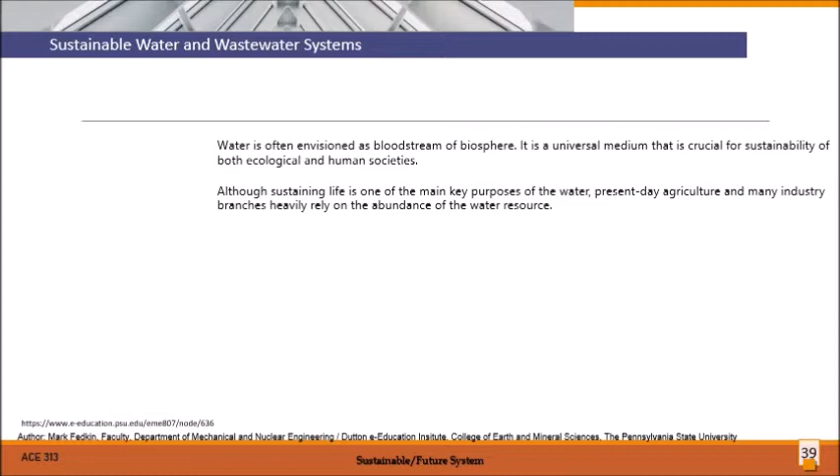This is the continuation of the report on Sustainable Future Systems: sustainable water and wastewater systems. Water is often envisioned as the bloodstream of the biosphere. It is a universal medium that is crucial for the sustainability of both ecological and human societies. Although sustaining life is one of the key purposes of water, present-day agriculture and many industry branches heavily rely on the abundance of the water resource.

To plan sustainable utilization of water resources, we must understand how water cycles. A water cycle works at the global and local scales. The amount of water on Earth is finite, and the natural water cycle is a system that controls the circulation and redistribution of that resource. Annual evaporation from the ocean is about 80,000 cubic miles versus 15,000 cubic miles from the land. Given the amounts of water evaporated and precipitated are almost equal, the total amount of water exchanged between the atmosphere and the Earth's surface is about 95,000 cubic miles.

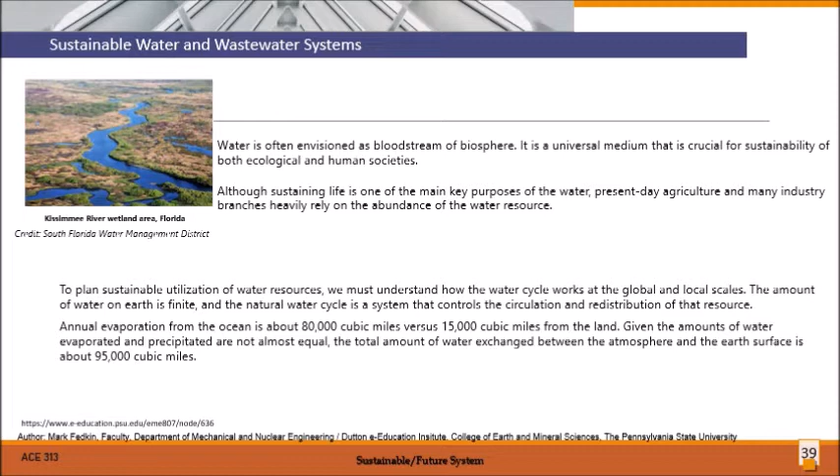Here are examples of possible actions that help keep combined water systems sustainable. First, water regime management. It keeps aquifer levels within an appropriate range, prevents flood damage in developed areas, and prevents excessive erosion. Water quality: minimize the export of pollutants to surface water or groundwater. It minimizes waterborne sediment loading, minimizes pollution from sewage, and protects existing vegetation.

Next is water conservation. Control water extraction and use. Promote the use of rainwater and stormwater, where such use does not adversely affect existing environmental values. Promote the reuse of wastewater effluent. Reduce irrigation requirements. Promote opportunities for localized supply. Water value: enhance water-related environmental values, enhance water-related recreational and cultural values, and add value while minimizing development costs.

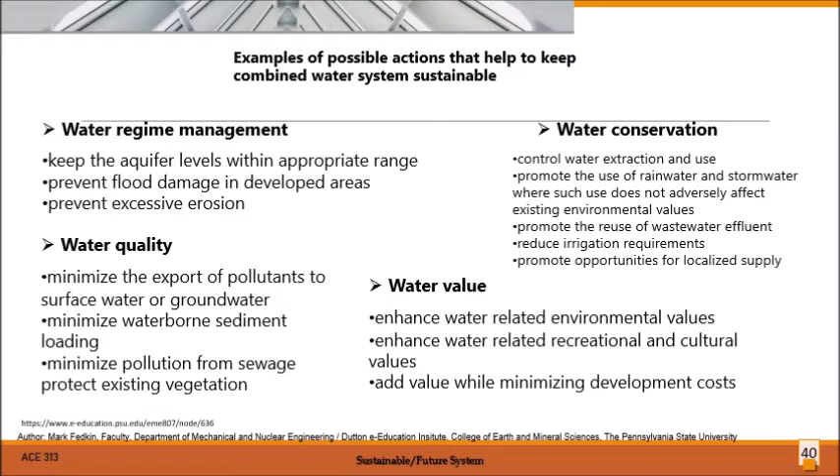Next is water conservation and protection technologies. Although residential water consumption accounts for a smaller fraction of the whole, domestic water economy is considered an important factor in urban sustainability. The overall domestic water use is expected to grow as world population grows, right?

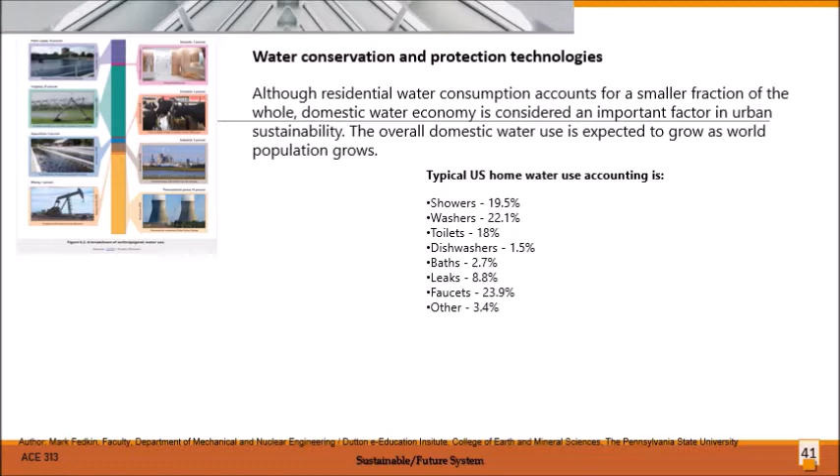Okay, next slide. Water conservation strategies. As the population grows, so does the stress on available water resources. Hence, there are a number of water conservation strategies. Limiting the consumption: application of policies, economics, and technologies helps regulate the demand. Policies may include restrictions and bans on certain types of water use, standards for fixtures and appliances, enforcement of recycling, etc. Economic measures, such as setting prices for water consumption, typically make people more diligent about their water-related activities. So, once money is involved, people pay attention.

Technological advances may help us use less water for the same function, like water economy washers, toilets, etc. Reuse and recycle: designing systems for reuse and recirculation of water in both domestic and industrial applications is involved in this approach. For example, treated wastewater can be used for irrigation, or water can be recycled in certain types of car wash systems. Elimination of losses, regulation, metering, water-sensitive design, and smart technology are key factors contributing to this strategy. Leak identification systems and smart controllers for water use are some such conservation technologies.

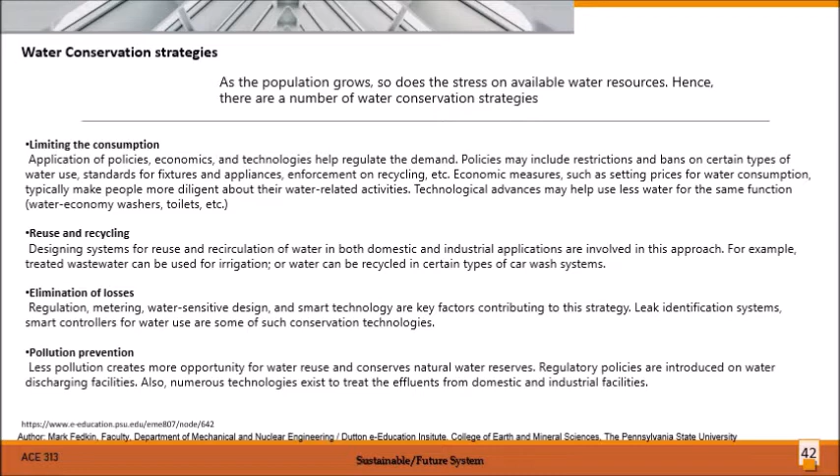Next is pollution prevention. Less pollution creates more opportunity for water reuse and conserves natural water reserves. Regulatory policies are introduced on water discharging facilities. Also, numerous technologies exist to treat the effluents from domestic and industrial facilities.

Water treatment systems. Water treatment technologies are designed to eliminate harmful effects of pollutants and natural substances on human health and the environment. These technologies are often placed at the transitions between the environment and the human sphere to adapt the water quality. So this is the water treatment system.

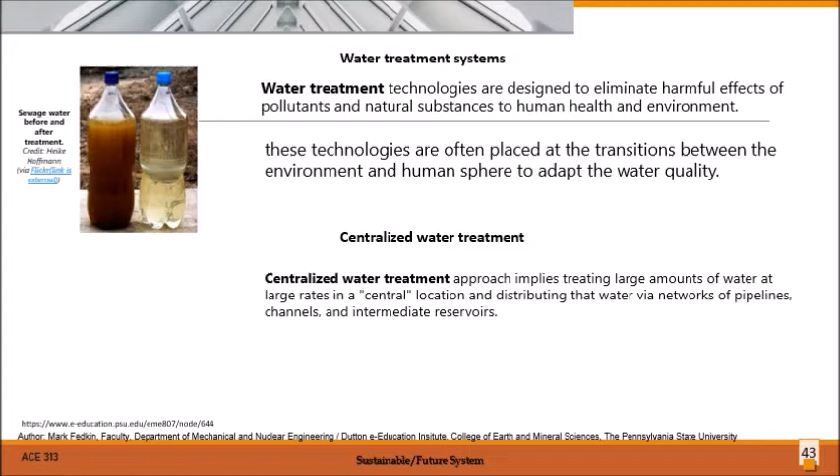Sewage water before and after treatment. Centralized water treatment. This approach implies treating large amounts of water at large rates in a central location and distributing that water via networks of pipelines, channels, and intermediate reservoirs. So, like the water district.

And engineered ecological systems for water treatment. Traditional water treatment plants accomplish an important function. However, these facilities themselves produce significant environmental impact by consuming energy, producing emissions, byproducts, and waste to be disposed of.

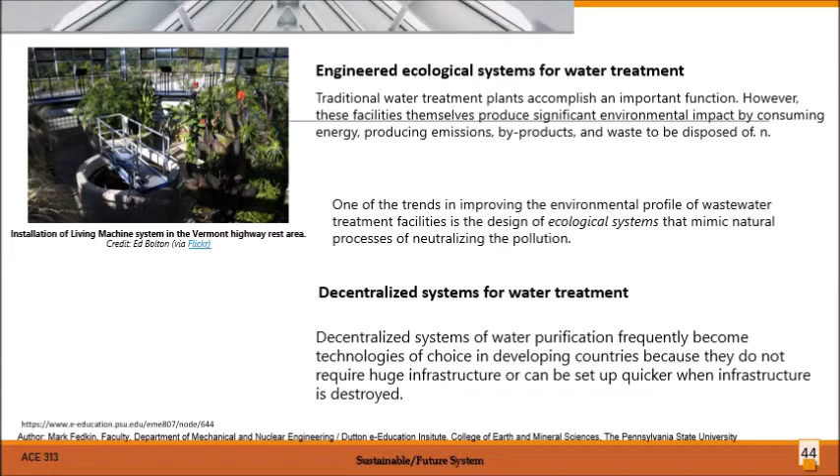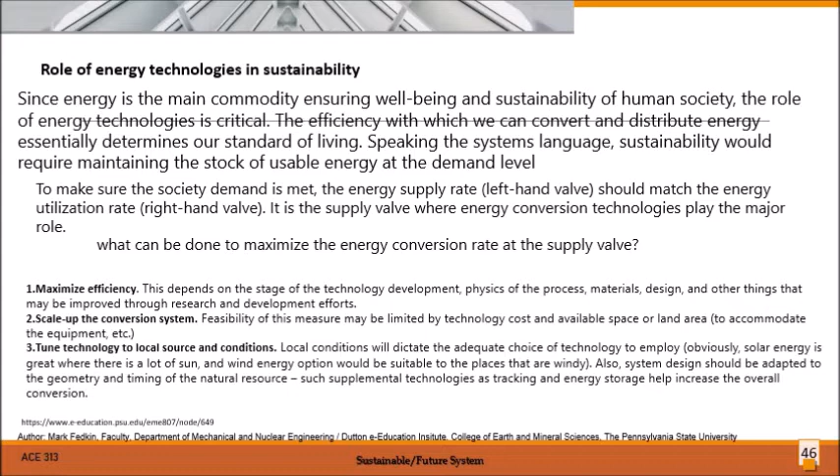Local conditions will dictate the adequate choice of technology to employ. Obviously, solar energy is great where there is a lot of sun, and wind energy options would be suitable to places that are windy. Also, system design should be adapted to the geometry and timing of the natural resource, and supplemental technologies such as tracking and energy storage will help increase the overall conversion.

Building integrated solar energy technologies. PV basics. Since this was already discussed by the previous reporter, this is just the review. Okay, so PV basics. Photovoltaic PV technology is one of the ways to convert solar resource into usable energy, specifically sunlight to electricity.

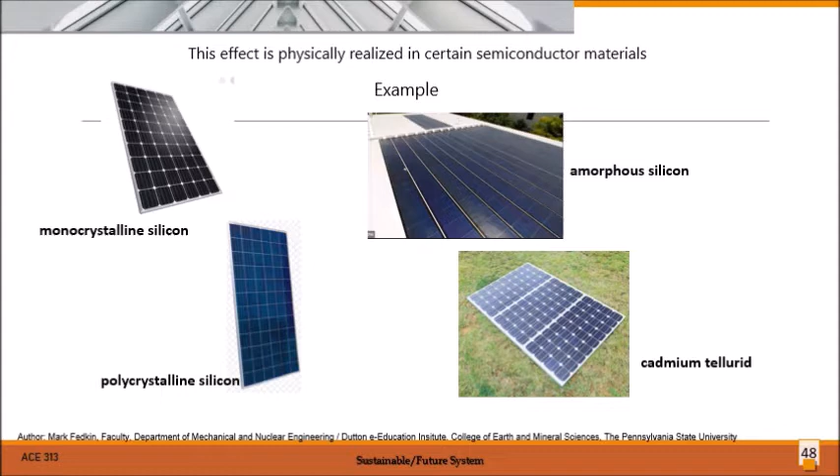Photovoltaic conversion is enabled by certain semiconductor materials, which have a property to generate electric current when they absorb incident photons. Absorption of light, generation of charge carriers, electrons and holes, separation of charge carriers so that they can perform work. So from solar cell to solar module and solar systems. This effect is physically realized in certain semiconductor materials, for example, monocrystalline silicon, amorphous silicon, polycrystalline silicon, and cadmium telluride.

So PV application in buildings. Current applications of solar photovoltaics are adapted to the following scales. Portable, small electronics, for example calculators and computers, etc. Distributed power generation, the homes, isolated equipment. Utility scale power, solar farms. In the scale-up process, single PV cells are combined into modules, and modules can be arranged into arrays: cells, modules, and arrays.

Building Integrated Photovoltaics, or BIPV, are multifunctional materials that are both structure supporting and power generating at the same time.

Building facade with integrated photovoltaic panels. Well, the main function of a conventional PV system is efficient power generation. The building integrated PV systems, which become the components of the building envelope, must satisfy a number of additional requirements such as appearance, color, image and size, weathertightness, wind loading, durability,

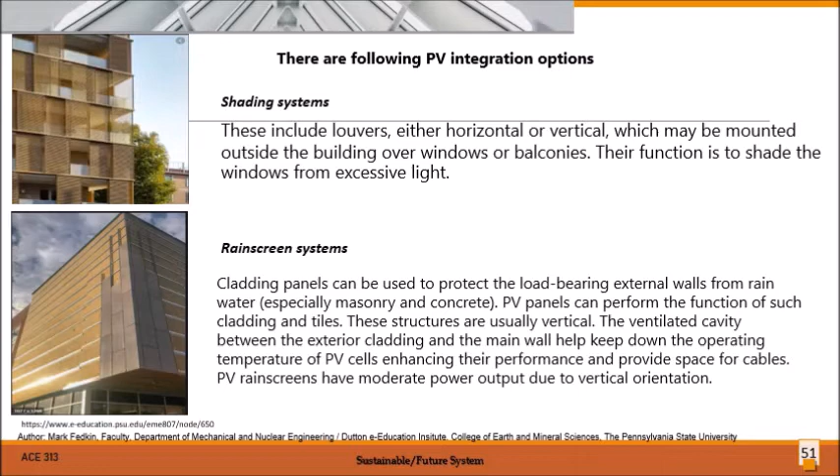The stick system curtain walls and also the unitized curtain walls. So the stick system curtain walls are used in those buildings that have internal columns or structural steel to support the main loads. Curtain walls are not weight-bearing, and their main function is to resist air and moisture infiltration. Also, building insulation is often attached to them. Warm facade.

A popular solution is to build the curtain walls from aluminum and steel framing filled with glass panels. PV panels can be sealed into curtain wall structures in both the vision area or opaque area of the facade instead of regular glass.

The unitized curtain walls: the unitized wall segments are pre-assembled at a factory and then delivered to the building site. The controlled industrial environment provides more precision and quality of sealing the PV panels into the wall framework and making cable connections. Double skin facades.

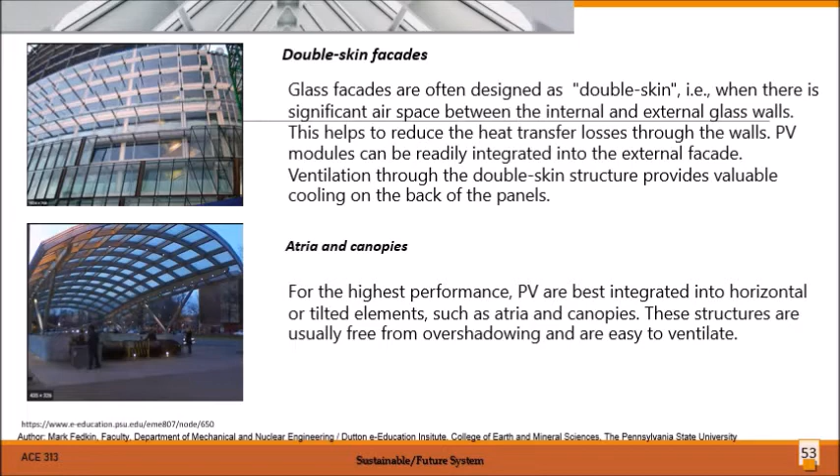The solar thermal electric power generation. Solar thermal technologies are designed to convert the incident solar radiation into usable heat. The process of solar heat conversion implies using energy collectors, especially designed mirrors, lenses, heat exchangers, which would concentrate the radiant energy from the sun and transfer it to a carrier fluid.

The fluid passes through the sunlight collector and becomes very hot. Typically, heat carrier fluids are water or steam, oil or molten salt. Then the fluid is transferred to the heat engine, which converts the energy to electricity.

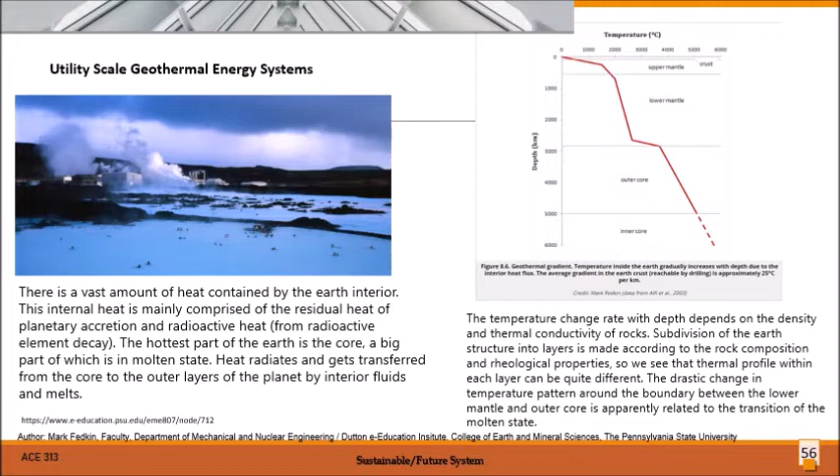Wind energy applications and technologies. Wind energy is primarily used for power generation. Wind power conversion systems have been increasingly employed in the US, Europe, India, and more sparingly in some other locations over the last decade, due to the development of technology that allows relatively high efficiency of wind resource conversion. We have here a video on how wind energy or the wind turbine works. Please watch this.

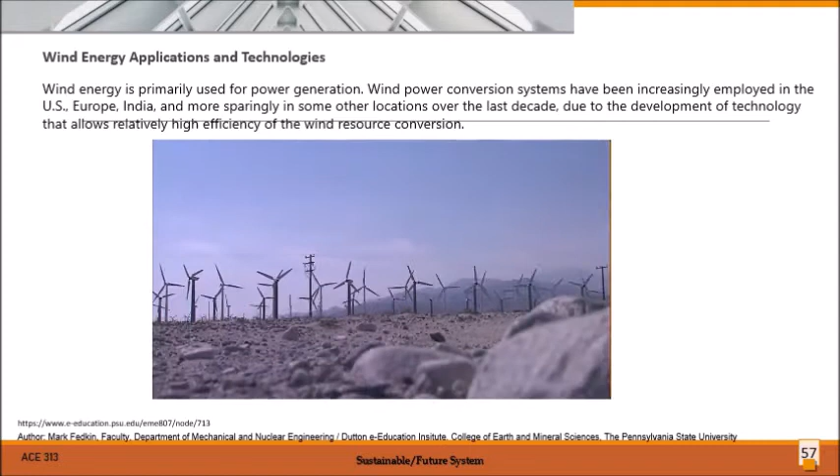We've all seen those creaky old windmills on farms, and although they may seem about as low-tech as you can get, those old windmills are the predecessors for new modern wind turbines that generate electricity. The same wind that used to pump water for cattle is now turning giant wind turbines to power cities and homes. Okay, have a look at this wind farm in the California desert. A hot desert next to tall mountains, an ideal place for a lot of wind. Here's another one on the windy prairies of Wyoming. Now, today's wind turbines are much more complicated machines than the old prairie windmills, but the principle is the same. Both capture the wind's energy.

Okay, here's how it works. First, a wind turbine blade works sort of like an airplane wing. Blowing air passes around both sides of the blade. The shape of the blade causes the air pressure to be uneven, higher on one side of the blade and lower on the other. And that's what makes it spin. The uneven pressure causes the blades to spin around the center of the turbine. On the top, there's a weather vane that's connected to a computer to keep the turbine turned into the wind so it captures the most energy.

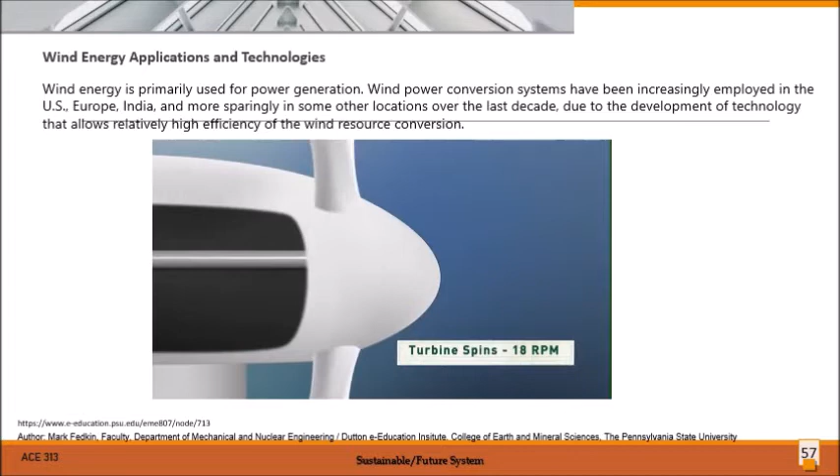Now the blades are attached to a shaft which only turns about 18 revolutions a minute, and that's not nearly fast enough to generate electricity by itself. So the rotor shaft spins a series of gears that increase the rotation up to about 1800 revolutions per minute. And at that speed, the generator can produce a lot of electricity.

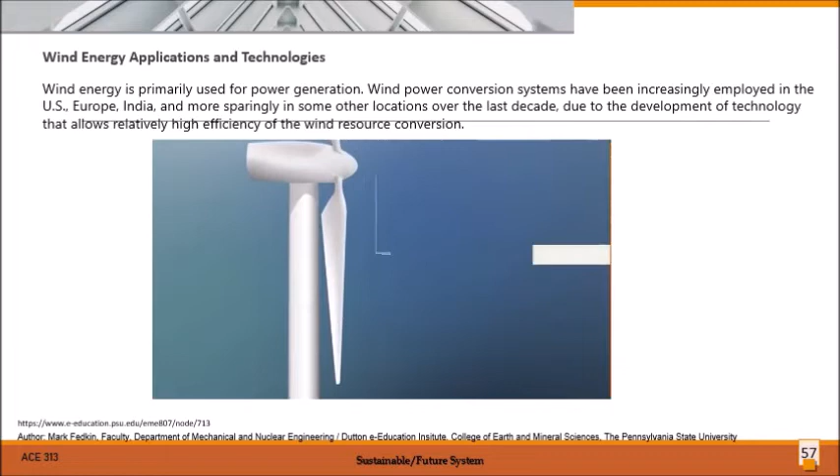So why are wind turbines so tall? Well, the higher up you go, the windier it is. More wind naturally means more electricity. And in many cases, larger turbines can also capture wind energy more efficiently. The blades can sweep a circle in the sky as long as a football field. Now, what's really cool is that even a small wind farm, like this one in Wyoming, can generate enough electricity to power more than 9,000 homes. And larger farms can provide much more clean energy for our homes and businesses.

Energy Return on Investment, or EROI. EROI is a common metric applied to energy conversion systems. It is defined as the ratio of the lifetime usable energy generated by the system to the energy spent for the system manufacturing, operation, maintenance, and disposal. Obviously, EROI equals 1 would mean that over its lifetime, a system produces as much energy as is being consumed for its creation and operation.

For wind turbines, the typical estimate of the EROI is in the range from 5 to 35, depending on the type of system. This indicator significantly increases with the size of the turbine rotor. The latest generation large-scale turbines yield EROI values of about 35 and higher.

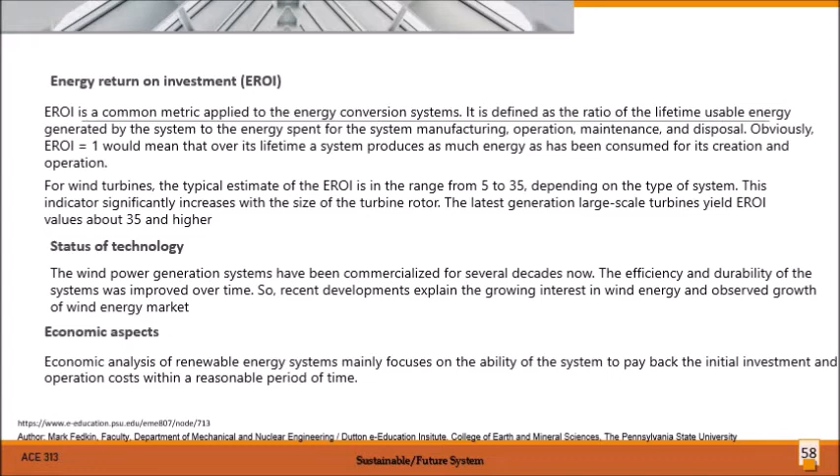Status of technology. The wind power generation systems have been commercialized for several decades now. The efficiency and durability of the systems was improved over time. So, recent developments explain the growing interest in wind energy and the observed growth of the wind energy market. Economic aspects. Economic analysis of a renewable energy system mainly focuses on the ability of the system to pay back the initial investment and operation cost within a reasonable period of time.

The biomass fueled combined heat and power system. Biomass as a source of fuel has been part of global energy economy throughout the human history. Using biomass as fuel via combustion may help solve the fuel supply issue, since biomass is renewable, but does not help solve the global carbon emission and pollution problem.

Burning biomass produces CO, CO2, NOx, and other gases at levels exceeding those from traditional fossil fuels. The biomass combined heat and power, CHP. Biomass-fueled CHP or cogeneration is one of the applied technologies developed as a cost-effective method of energy recovery, because the byproduct heat generated in electricity generation is not wasted, but rather utilized as thermal energy.

The total efficiency of such systems reaches from 60 to 80%. There are three main stages in the biomass fueled CHP process. First is the biomass collection and preparation. Secondly, biomass conversion, A, to steam or B, to biogas. Third, power and heat generation.

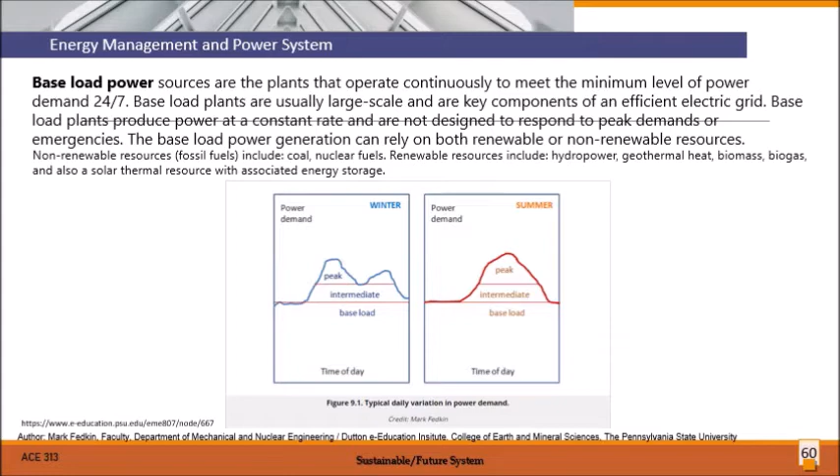There are a number of reasons why a plant can have lower than 100% capacity factor. Some of them are lower demand for electricity over certain periods of time, under capacity operation due to maintenance, equipment failures or interruptions, resource fuel shortage, equipment upgrade, or resulting in high nominal capacity.

The base load power plants typically are coal-fueled or nuclear plants due to low-cost fuel and the steady-state power they can produce. Hydropower and geothermal power can also be used for base load electricity generation if those resources are regionally available. Apparently, the difficulty with renewables is their intermittence in time and location bias. Comparison of typical capacity factors of various energy systems reflects this difficulty.

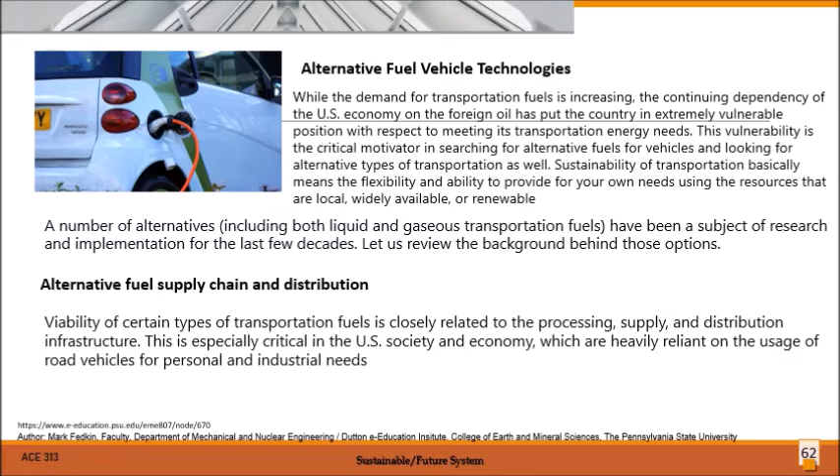Transportation emissions. Strong motivators for developing alternative vehicle technologies and fuels are growing emissions and alarming urban air pollution levels. According to US EPA, in 2017, CO2 emissions from the transportation sector surpassed the long-time leader, the electric power sector, in the total national emissions budget. This change in leadership in part happened due to increasing addition of natural gas and renewable sources to the power generation mix while retiring older coal power plants in a number of states.

Zero-emission vehicles. The concept of zero-emission vehicles is typically attributed to the transportation options that do not result in any harmful emissions during vehicle operation. Harmful emissions are defined as those known to have a negative impact on the environment or human health.

Typically, examples of zero-emission vehicles are electric or battery-powered cars, electric trains, hydrogen-fueled vehicles, and human or animal-powered transportation, for example bicycles, velomobiles, carriages, etc. The battery technology for electric vehicles is based on charge or discharge cycles, meaning that the battery is charged beforehand using an electric source and is discharged during vehicle operation.

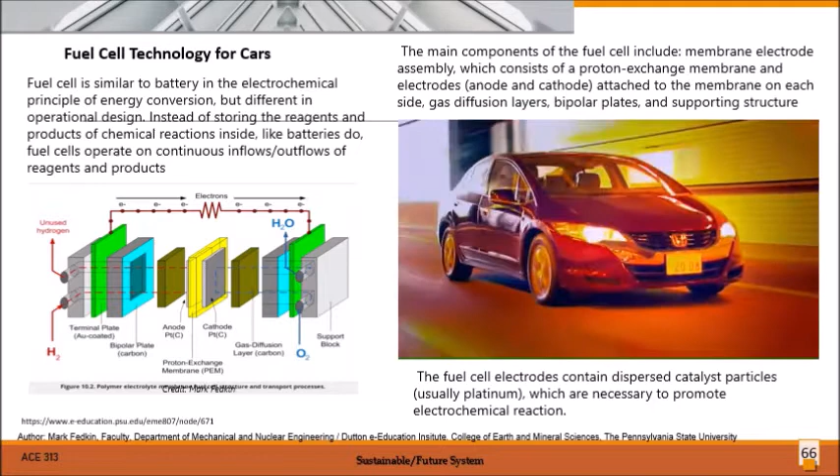Fuel cell cars, which run on electricity produced from compressed hydrogen, emit zero harmful emissions and could be the future of motoring. They can be just as fast, practical, and can travel as far as a conventional petrol or diesel engine car, but their technology is very different, and importantly, the only thing that comes out of the exhaust is water vapor.

Rather than having a petrol or diesel tank like a conventional car, the fuel cell car has a tank that stores compressed hydrogen as a gas. Hydrogen is used as an energy carrier so that the fuel cell car can produce its own electricity on board rather than storing it in batteries. This compressed hydrogen is expanded and then fed into the fuel cell stack.

The fuel cell stack is like a tiny electric power station. Inside it, the hydrogen combines with oxygen from the air to generate electricity and water as a byproduct. Water vapor is the fuel cell car's only emission. The electricity created inside the fuel cell stack is used to power the electric motor, which is in turn used to drive the car.

The fuel cell stack is made up of hundreds of individual cells stacked together like a loaf of bread. In fact, each cell is like a sandwich with a membrane electrode assembly, or MEA, between two separators, or bipolar plates. The MEA is made up of a proton exchange membrane, or PEM, which sits between hydrogen and oxygen electrode layers and gas diffusion layers.

In each cell, hydrogen gas passes over the hydrogen electrode. Each hydrogen atom is converted into a hydrogen ion in a catalytic reaction, releasing an electron in the process. The hydrogen ions then pass through the electrolytic membrane, where they bond with oxygen ions straight from the atmosphere. The previously emitted electrons from the hydrogen molecules arrive at the oxygen electrode via an external circuit.

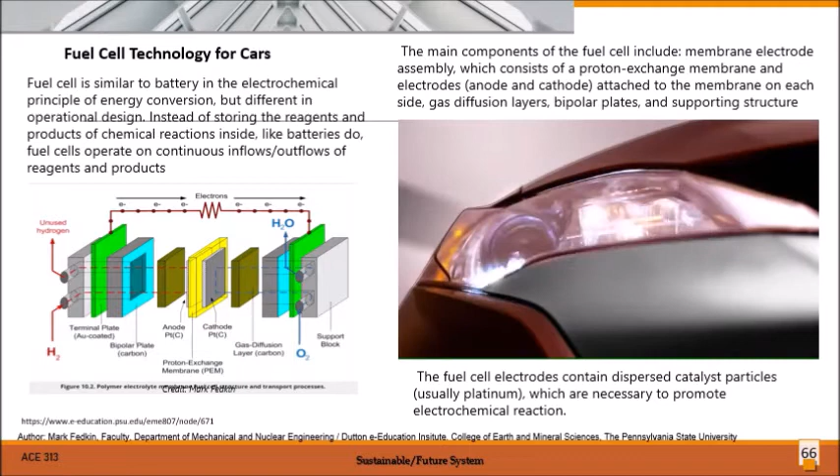Honda's FCX Clarity is the world's first production fuel cell car and is already on sale in the US and Japan.

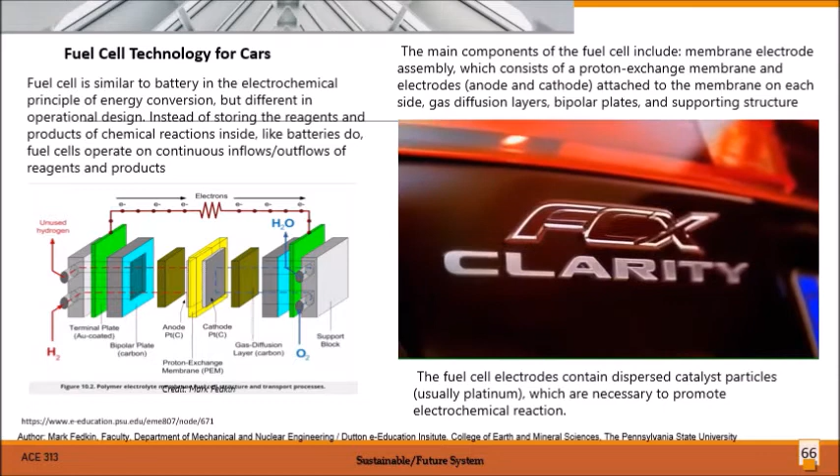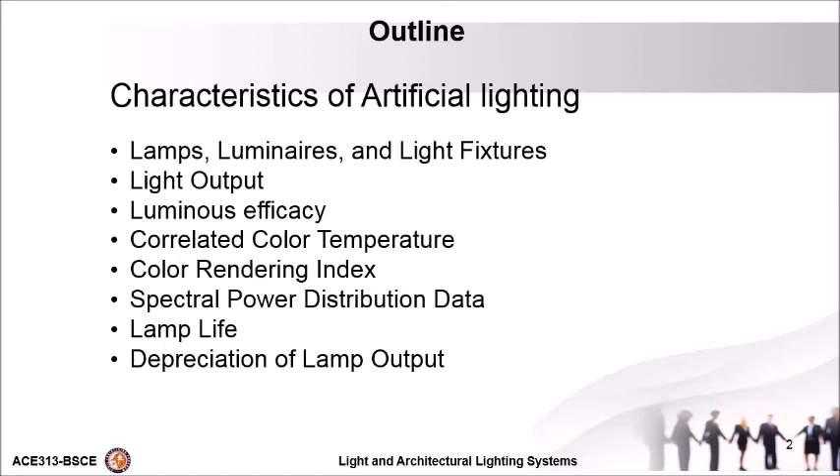So first is lamps, luminaires, and light fixtures. So lamps is a device that generates light, although frequently called a light bulb by the layperson. The term lamp rather than bulb is used in the lighting industry to avoid confusion when describing a light source, simply because a bulb is the glass portion of a lamp that encloses and protects the working parts of the light source, whereas a lamp is a source of light.

Lamps fit into two broad categories. First is incandescent lamp. Incandescent lamp or incandescent light globe is an electric light which produces light with a filament wire heated to a high temperature by an electric current passing through it until it glows. The hot filament is protected from oxidation with a glass or quartz bulb that is filled with inert gas or evacuated. The light bulb is supplied with electrical current by feed through terminals or wires embedded in the glass.

Most bulbs are used in the socket which provides mechanical support and electrical connections and has the capacity of 700 to 1000 hours and the temperature reaches about 2200 Celsius.

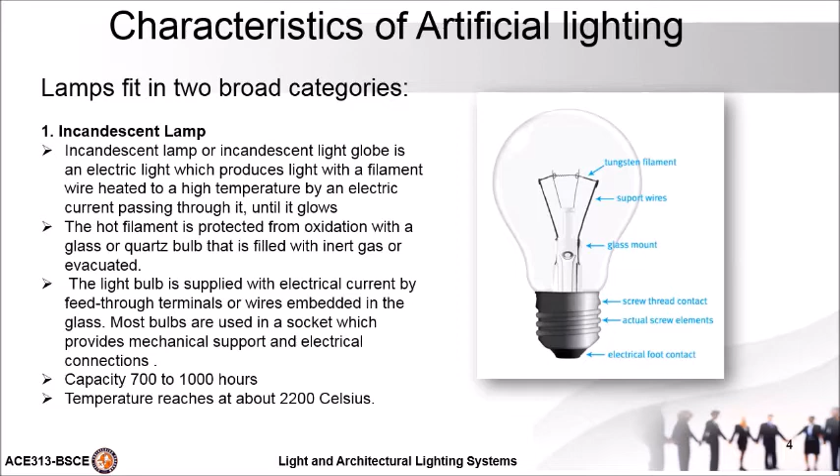Okay, second is gaseous discharge lamps. Gaseous discharge lamps can be further divided into two subcategories. First is low pressure lamps. A low pressure sodium lamp is a type of lamp that produces light from sodium gas contained in the bulb, operating at a partial pressure of 0.13 to 1.3 Pascal. Low pressure sodium lamps are highly efficient electrical light sources. They emit a very yellow light and require a ballast like fluorescent bulb.

Low pressure sodium lamps require up to 10 minutes to start and have to cool before they can restart. Therefore, they are most suitable for applications where they stay on for hours at a time. Most LPS lamps are used for driveways, parking lots, and pathways.

The second subcategory for gaseous discharge lamps is high pressure or HID lamps. High pressure sodium lamps, also known as HPS lamps or HPS lights, are a type of sodium lamp that is widely used in industrial lighting in many public outdoor areas. They are commonly used in public parking lots, roadways, and other security areas. High pressure or HID lamps include mercury vapor, metal halide, and high pressure sodium lamps. It produces a dark pink glow when first struck, and an intense pinkish orange light when warm.

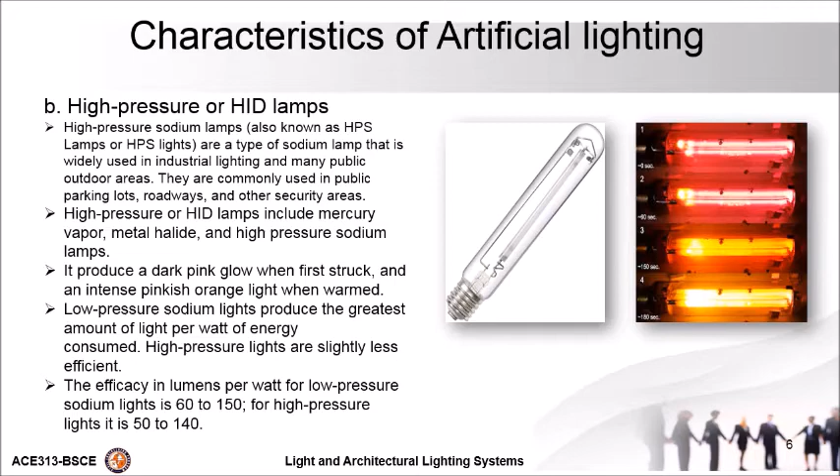Luminaires and light fixtures. Lighting fixtures, also called luminaires, help to create artificial light with the help of a lamp. Some luminaires also have a switch to control the intensity of the light. A light fixture is a device that projects, diffuses, and alters the light direction of a given light source. Luminaires can also be referred to as a system, as it contains the light source, the housing, the electrical system, the main connectors, reflectors, and shielding devices, or louvers.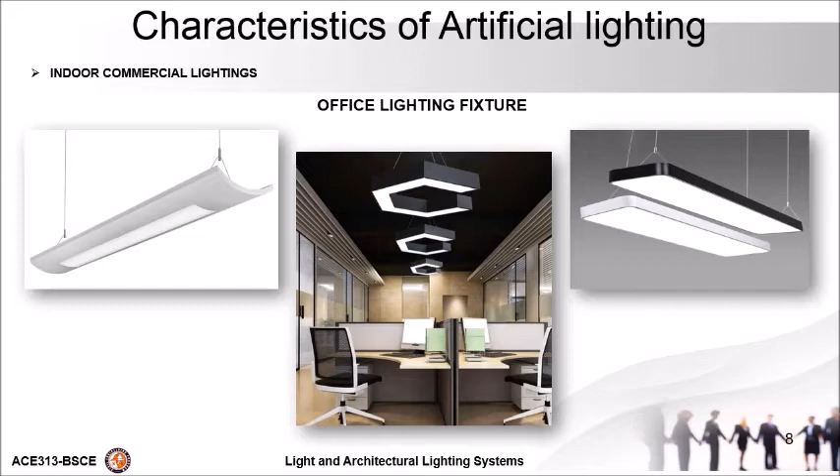Luminaires are categorized by two major classifications of prime usage: indoor or outdoor applications. So for indoor, we have commercial and industrial, and for outdoor, we have public and amenity. Here are some examples for indoor commercial lighting: the office lighting fixture and the retail lighting fixture.

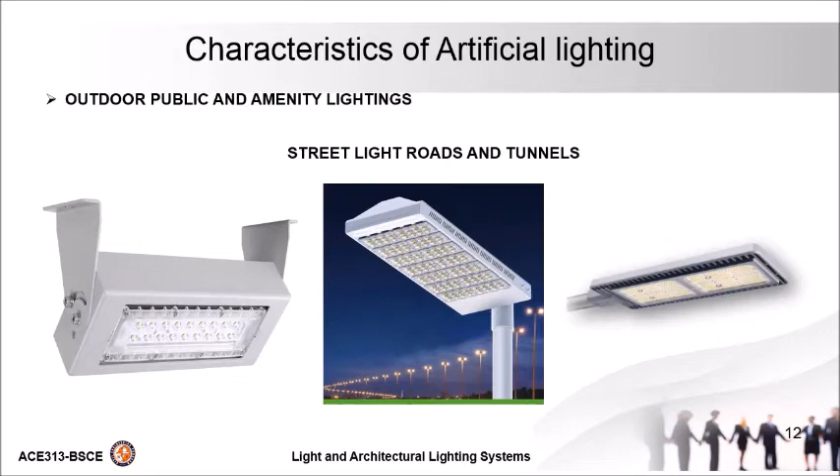Light output. Luminous flux. Luminous flux or luminous power is the measure of the perceived power of light. It differs from radiant flux, the measure of the total power of electromagnetic radiation, in that luminous flux is adjusted to reflect the varying sensitivity of the human eye to different wavelengths of light. The luminous flux is measured in lumen, simply lm. A lumen is defined as the quantity of light given out through a steradian by a source of 1 candela of intensity radiating equally in all directions.

1 lumen is luminous flux, or expressed more simply, the total amount of light energy emitted into one solid angle, 4 pi steradian, by a point source having a luminous intensity of 1 candela. Its flux is equal to 4 pi. The steradian, or simply sr, is the SI unit of solid angular measure, where there are 4 pi or about 12.5664 steradians in a complete sphere, about 7.96% of the area of the sphere.

Luminous intensity. A candela, or simply cd, is the SI unit of luminous intensity, that is the power emitted by a light source in a particular direction. 1 candela is 1 lumen per steradian.

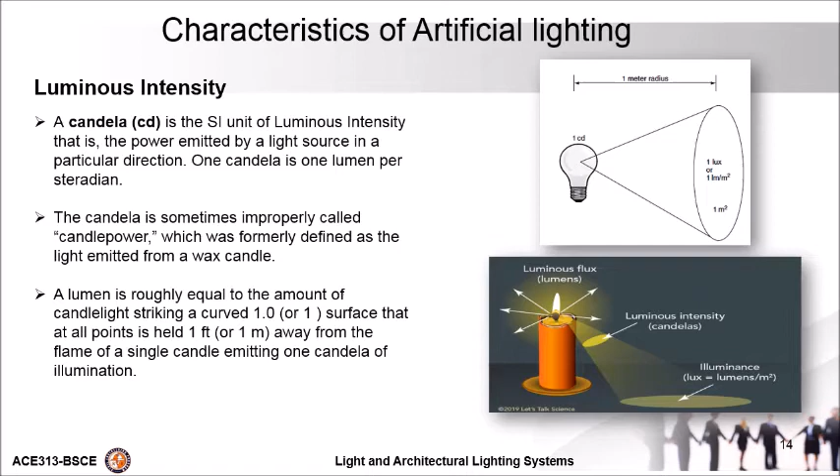Luminous efficacy. Luminous efficacy is the ratio of the light output of a light source, a specific lamp, to the electrical energy consumed, including the ballast if applicable, to produce that light source. It is expressed in units of lumen per watt of electric power, and is thus typically referred to as LPW. LPW is equal to light output, or lumen, over power input, or watt.

To apply this formula, let's have an example. Determine the luminous efficacy of the following lamps. First is a 40 watt incandescent lamp that emits 505 lumen of light. So we have the given light output, which is 505 lumen, over the power input, which is 40 watt. So we get 12.6 lumen per watt.

For the second example is a 40 watt fluorescent lamp and a 4 watt ballast that emits 3050 lumen of light. So we have the given light output, which is 3050 lumen, over power input, which is 40 watt and a 4 watt ballast. We just add them, so it becomes 44 watt, and we get 69.3 lumen per watt.

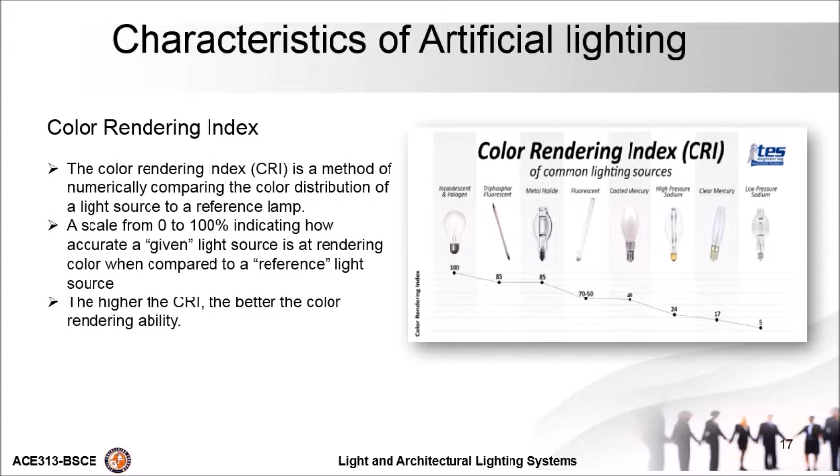Spectral power distribution data. A spectral power distribution curve is a graphic presentation of the quantities of light emitted by a lamp by wavelength component. These curves are a plot of radiant power versus a specific wavelength across the light spectrum. They provide a visual fingerprint of the color characteristics of the light emitted by the source over the visible part of the spectrum.

A spectral power distribution curve of an ordinary household incandescent lamp will typically show a large increase in radiant power from 380 nanometer to 780 nanometer. Light emitted by the source is weak in violet wavelengths, 380 to 400 nanometer. It increases through blue, green, yellow, and orange wavelengths and is very strong in red wavelengths, 600 to 750 nanometer. This type of lamp illuminates yellow, orange, and red colored objects very well.

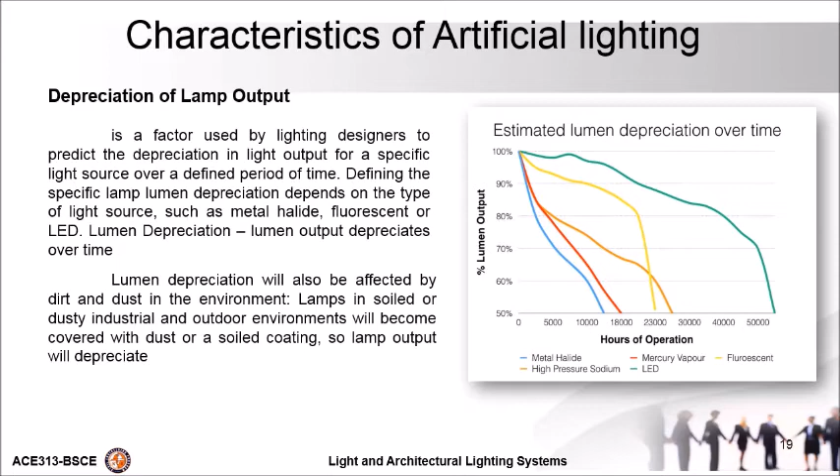Lamp life. The rated life of a lamp is its median life expectancy, expressed in hours. It is the cumulative time that lapses before 50% of a representative group of lamps has failed and the other lamps in the group continue operating. In other cases, rated life is difficult to determine because these lamp types will continue to emit light but get dimmer and dimmer with time. That is, they do not burn out.

Lamp life generally decreases each time a lamp is switched on and off. A continuously lit lamp will normally last much longer than one that is switched on and off regularly. Because of energy cost, this reduction in life does not warrant leaving lights on in an unoccupied space.

Life of incandescent lamps will be affected by the voltage they operate at versus the voltage for which they were designed. A slightly lower voltage means increased life because of cooler operation, but this reduces light output. Life of fluorescent and HID is greatly affected by the type of ballast. Lamp and ballast must be matched to ensure proper operation.

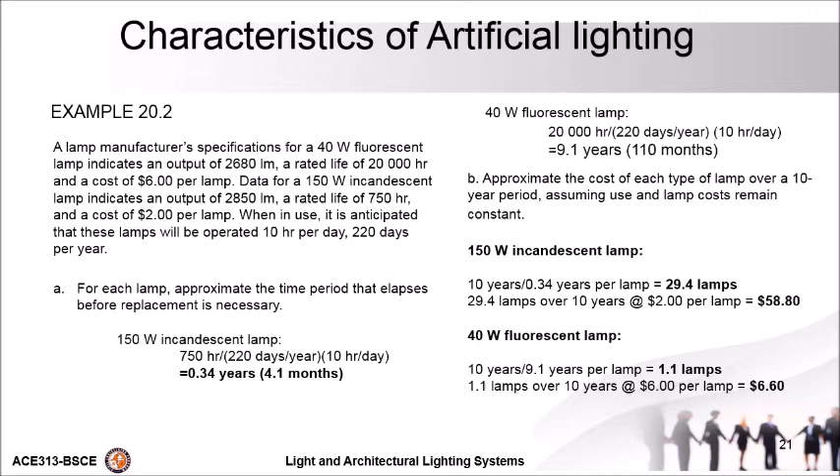My name is Kechi Esperona, and my topic for today is about light and architectural lighting systems. My topic outline for today is incandescent lamps, tungsten halogen lamps, luminous efficacy, gaseous discharge lamps, fluorescent luminaire efficacy, high-intensity discharge lamps, blended lamps, solid-state lighting, and mercury content of lamps.

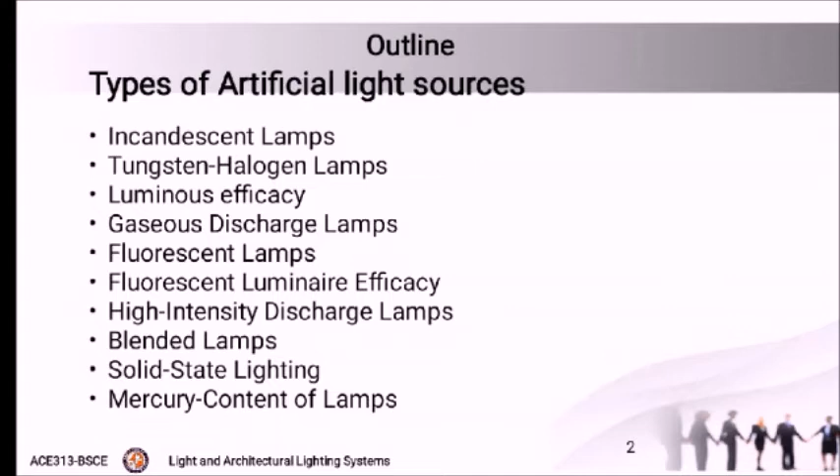The first decision in the design of a good lighting system is the choice of light source. There are three groups by construction and operating characteristics: the incandescent, the fluorescent, and the HID. The HID lamps can be grouped into four major classes: high-pressure sodium, metal halide, mercury, and low-pressure sodium.

First is incandescent lamps. What are incandescent lamps? These lamps produce visible light by heating a tiny coil or filament of tungsten that glows when it is heated by an electrical current. These are the familiar source of light, the so-called light bulb. Its advantages are low lamp cost, reliability, familiarity, and good color rendition. But they have a short rated life and poor efficacy, or LPW, lumens per watt. Lumens per watt is a key measure of efficacy in lighting.

These incandescent lamps can be found in applications needing excellent color rendition, such as retail, furniture, clothing and grocery stores, hair and beauty salons, restaurants, and art studios. The basic design of the incandescent lamp has essentially remained unchanged since Thomas Edison introduced a commercially successful lamp in the late 1870s. Thomas Alva Edison was an American inventor and businessman who has been described as America's greatest inventor. He developed many devices in fields such as electric power generation, mass communication, sound recording, and motion pictures.

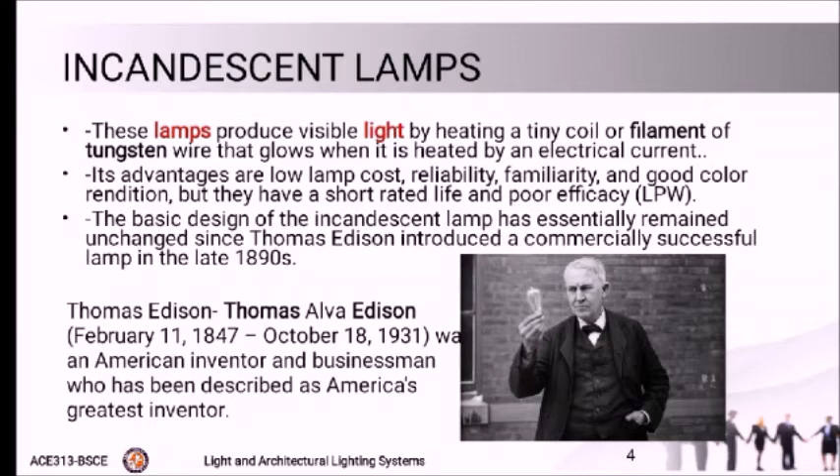When electricity flows through the filament of an incandescent lamp, the filament produces resistance against electrical current flow, causing it to heat up and incandesce, or glow with heat. That is where the word incandescent came from.

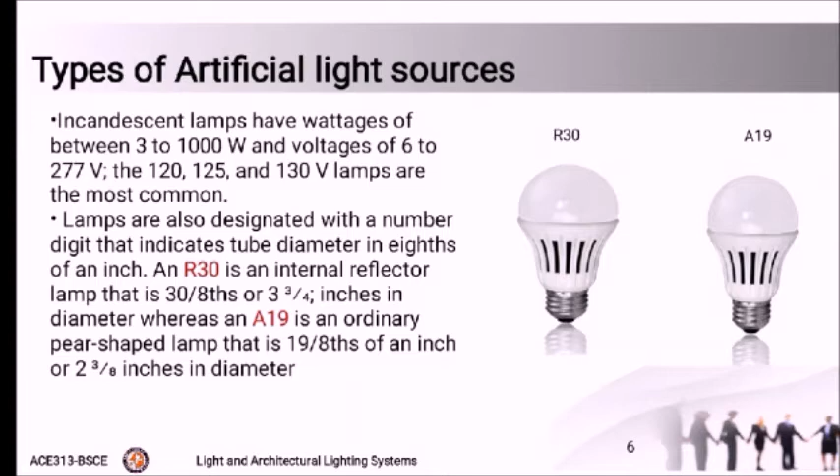The medium base is a familiar threaded base found with ordinary lamps up to 300 watts. The candelabra base is the smaller threaded base used in ornamental lighting such as chandeliers, and it is also known as the candle or the torpedo bulb because of its shape. And the mogul base is a larger threaded base found on lamps that are 300 watts or greater. An example is the frosted mogul base. It has 300 watts.

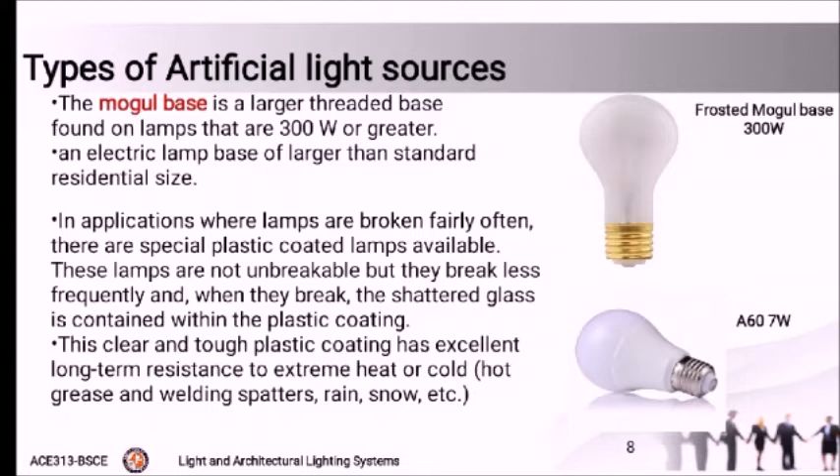In applications where lamps are broken fairly often, there are special plastic-coated lamps available. These lamps are not unbreakable, but they break less frequently. And when they break, the shattered glass is contained within the plastic coating. An example is the A60. This clear and tough plastic coating has excellent long-term resistance to extreme heat or cold.

Next is the tungsten halogen lamps. Tungsten halogen lamps, frequently called halogen lamps, are a smaller, brighter, and more expensive version of the incandescent lamp. These lamps contain high-pressure halogen gases such as iodine or bromine, which allow the tungsten filaments to be operated at higher temperatures and higher efficacies. A higher temperature chemical reaction involving tungsten and the halogen gas recycles evaporated particles of tungsten back onto the filament surface. This offers the advantages of better color rendition, more light output, and a longer life.

The tungsten halogen lamp cannot be touched by hand without depositing residual skin oils that substantially reduce the life of the quartz glass bulb. The same as the incandescent lamp, tungsten halogen lamps also have lamp designations: the TB, PAR, MR, T, and R. Tungsten halogen lamps have 6 components: the contact, base, capsule support, halogen-filled capsule, tungsten filament, and the bulb.

The tungsten filament of a halogen lamp has 2 purposes. One is to generate light, and the second is to generate the heat necessary to obtain a wall temperature exceeding 250 degrees Celsius. These lamps have been designed to maintain this required wall temperature when operated at design voltage.

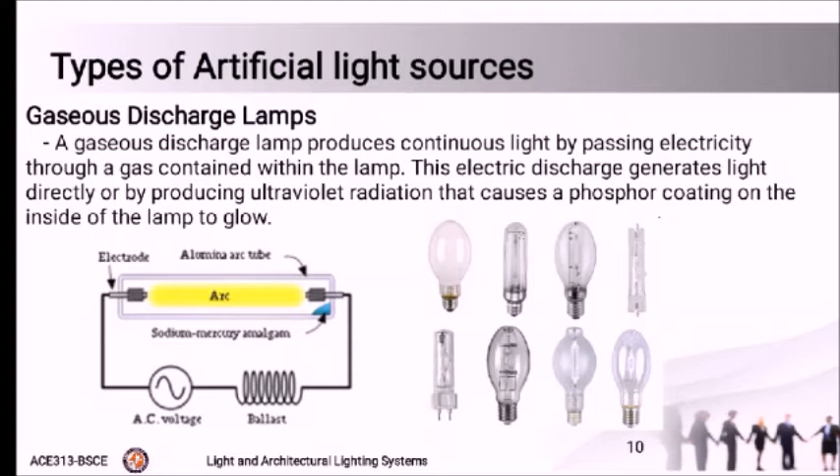All gaseous discharge lamps require an additional device called a ballast. A ballast is a voltage transformer and current limiting device designed to start and properly control the flow of power to discharge light sources such as fluorescent and HID lamps. It does not produce light directly. Instead, it is needed to create the starting voltage kick that causes the gas to arc and then controls the voltage, the current, and the waveform input to the lamp that is necessary for proper operation.

There are many types of ballasts. Magnetic or iron ballasts increase and control voltage. They are heavy and make a humming noise. Electronic ballasts use solid-state electronic components. They tend to operate more efficiently with less noise and are capable of dimming lamp or lumen output. A is extremely quiet, like libraries or churches. B is slightly noisy, like classrooms, seminars, or offices. And C is moderately noisy, like a workshop or open forum.

Next is fluorescent lamps. A fluorescent lamp is composed of a tubular glass bulb that is covered with a thin phosphor coating on its inside surface. The glass bulb is filled with low-pressure gas containing mercury vapor. The base or bases at the end of the lamp are designed to connect the lamp to an electrical circuit. Fluorescent lamps use 25 to 35% of the energy used by incandescent lamps to provide the same amount of illumination, or a lamp efficacy of 30 to 110 lumens per watt.

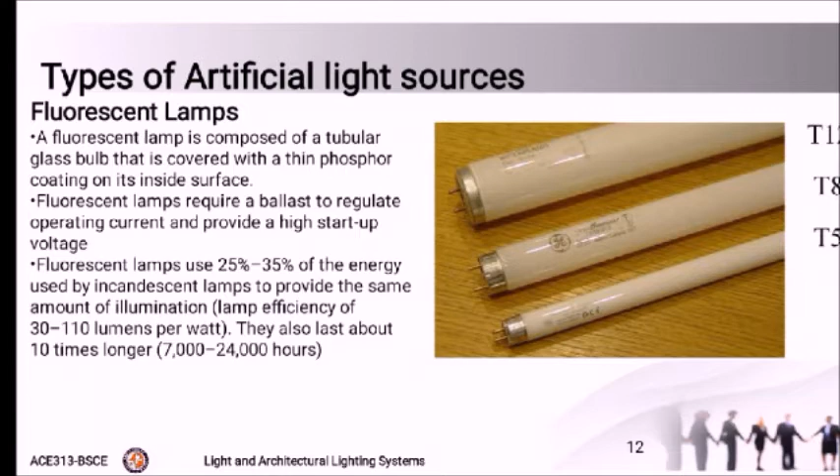They also last about 10 times longer, 7,000 to 24,000 hours. Cathodes are filament-like coils at the end of the bulb that act as terminals of the electric arc. When energized, ultraviolet radiation from the mercury arc causes the phosphor coating to fluoresce. That is, they emit visible light as a result of being irradiated by electromagnetic radiation.

Fluorescent lamps have 6 components: the AC main, switch, bipin, bimetallic contacts, cathode, and lastly the ballast. So there are types of fluorescent lamps. Linear fluorescent lamps, or LFL, are commercially available in straight, U-shape, or circular tube in a variety of sizes, wattages, voltages, colors, and types of bases.

A code composed of several digits is used to identify a specific lamp. For example, the standard lamp for general classroom and office lighting for several decades has been the F40 T12ES. The F is for fluorescent. The 40 indicates the nominal wattage. The T is for a tubular shape, or U for U shape, and C for circular shape. The 12 indicates tube diameter in eighths of an inch. And ES stands for energy saving.

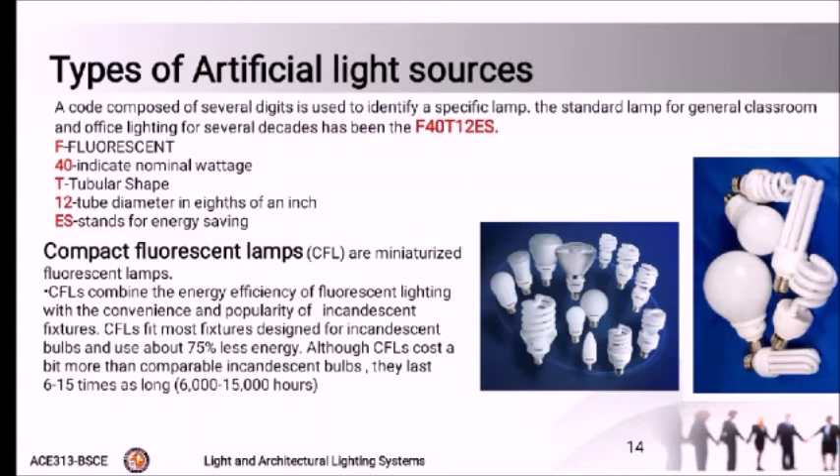CFLs fit most fixtures designed for incandescent bulbs and use about 75% less energy, although CFLs cost a bit more than comparable incandescent bulbs. They last 6 to 15 times as long, or 6,000 to 15,000 hours. These are designed as a substitute for standard size incandescent lamps.

The 7 watt CFLs replace 25 watt incandescent lamps. The 11 watt CFLs replace 40 watt incandescent lamps. The 13 watt CFLs replace 60 watt incandescent lamps. The 19 watt CFLs replace 75 watt incandescent lamps. And 23 watt CFLs replace 100 watt incandescent lamps.

The 120 volt lamps are the most commonly used fluorescent lighting in residential and light commercial applications. Structures that have 277 or 480 volt, 3-phase power available, such as retail shopping malls, schools, hospitals, groceries, supermarkets, and office buildings, typically use the 277 volt component of this system for the fluorescent lighting, where fixtures are not located closer than 3 feet away from windows, platforms, and fire escapes.

Fluorescent lamps come in a variety of colors or temperatures, such as daylight, cool white, soft white, warm white, and deluxe warm white, that cover the color temperature range from 3000 to 6500 Kelvin. Color temperature varies with the type of phosphor coating. The phosphor blend in a fluorescent lamp determines the color temperature and the color rendering of the light emitted by the lamp.

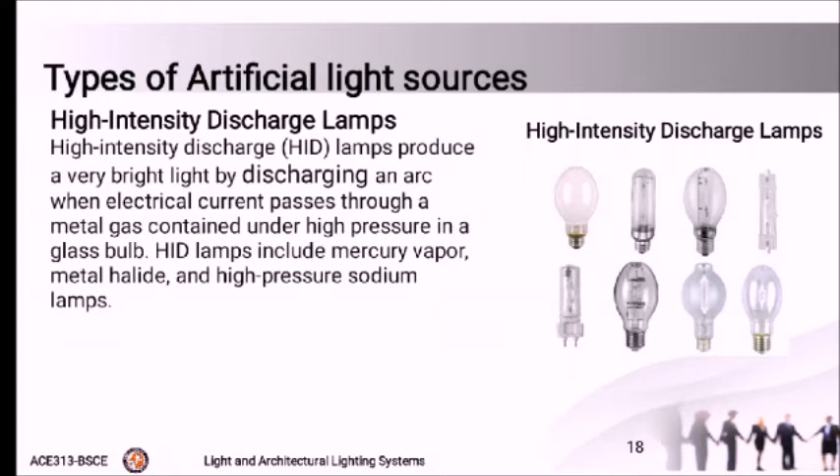HID lamps have an internal arc tube that contains the fill gas. A large outer glass bulb surrounds the arc tube to avoid shattering that can result from direct contact with water and other fluids. The following is a description of the common types of HID lamps. First is the mercury vapor, or MV. These lamps were the first commercially available HID lamps.

These lamps are constructed of an internal quartz tube enclosed in an outer glass envelope. A small amount of liquid mercury is sealed in an argon gas fill inside the quartz tube. After the warm-up period, the arc emits both visible and ultraviolet light. Phosphor coating can be added to improve color rendition.

The merc, as it's known, has been a workhorse for society, lighting streets, factories, and large areas for over 100 years. Metal halide, or the MH. Metal halide lamps are constructed in a manner similar to the MV lamps, except that in addition to the mercury and argon, various metal halides are included in the gas fill. Use of metal halides increases luminous efficiency and improves color rendition. They are available in wattages ranging from 32 to 1000 watts. The small 32 watt MH lamp produces 2500 lumens, about as much light as a 150 watt incandescent or a 40 watt, 4 foot fluorescent lamp.

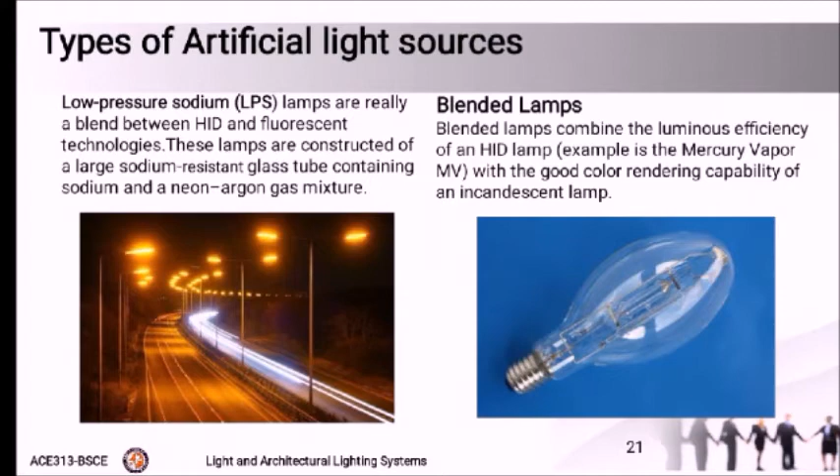Blended lamps. Blended lamps combine the luminous efficiency of an HID lamp like MV with the good color rendering capability of an incandescent lamp. The most common blended lamp has mercury vapor combined with a tungsten filament. The tungsten filament acts as an incandescent lamp, so a blended lamp requires no external ballast or other control devices. A key advantage of mercury tungsten blended lamps is that they are directly interchangeable with incandescent lamps and have a longer lamp life. A disadvantage is that they cannot be dimmed.

Solid-state lighting. Solid-state lighting, or SSL, refers to a type of lighting that uses light-emitting diodes or LEDs, organic light-emitting diodes or OLEDs, or polymer light-emitting diodes or PLEDs, instead of traditional lighting sources that use an electrical filament or gas inside a glass bulb. A light-emitting diode or LED is a semiconductor that consists of a chip of semiconducting material treated to create a structure with two electron-charged materials.

A single LED is about the size of a pea. It is powered by about 1 watt. LEDs are vibration and shock resistant. They have no moving parts, no fragile glass, no mercury, no toxic gases, and no filament. They are not subject to sudden failure or burnout and have an exceptionally long life, with a range of 50,000 to 100,000 hours.

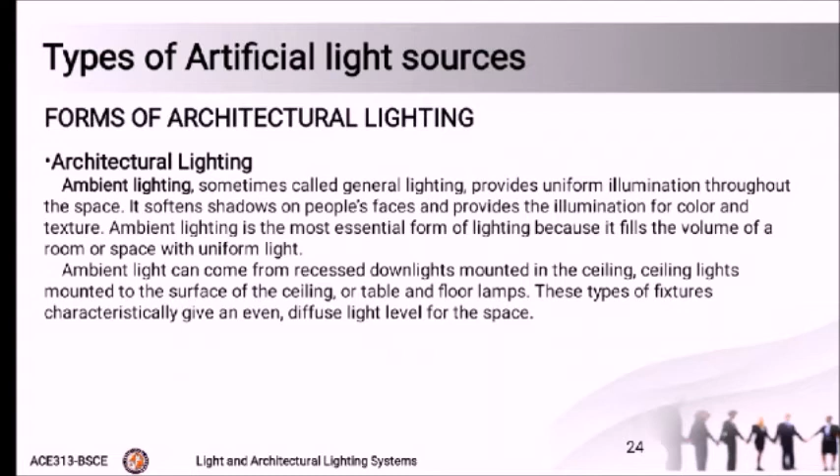Accent lighting is a directional lighting used to emphasize a particular object or area. It is used to call attention to or orchestrate interest by emphasizing a particular architectural feature, piece of art, photography, or plant. We mostly see it in a museum or a gallery. It's important to do accent lighting right, which means doing it subtly. Make people notice the object you're lighting, not the way that it is being lit.

Decorative lighting is the light source that adds a quality of interest to the space. It combines with other types of lighting to give an overall feel to a room and serves little purpose other than to look attractive. This type of lighting may be a hanging crystal chandelier used as a main feature in an entry or a dining space. It is like jewelry for the home. It helps your space sparkle and shine, its role being mainly aesthetic. It can be used as mood lighting and can take many different forms, depending on the style, the space, its function, and lots of other details.

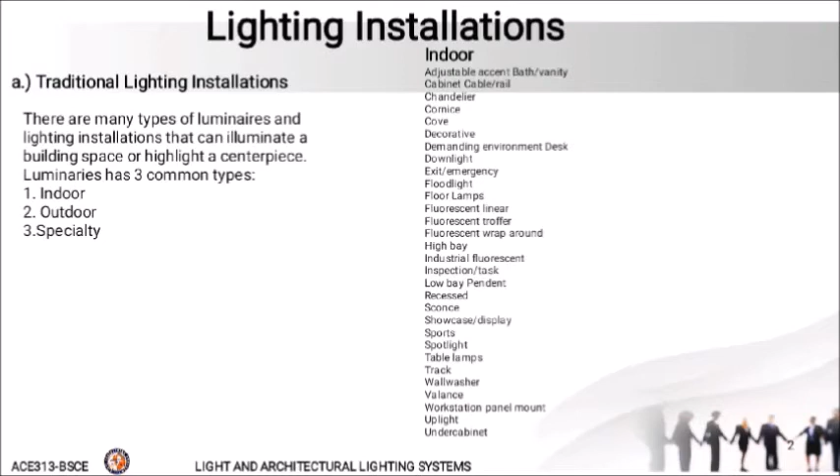We have seen examples of luminaires. Pendant. A pendant is a luminaire that is hung with a cord, chain, or tube that enables it to be suspended from a ceiling or other supports. It broadcasts light over the entire space. Uplight. An uplight is a luminaire where a shielded light source directs its light to the ceiling, where it is reflected back to the space. It is also used for decoration.

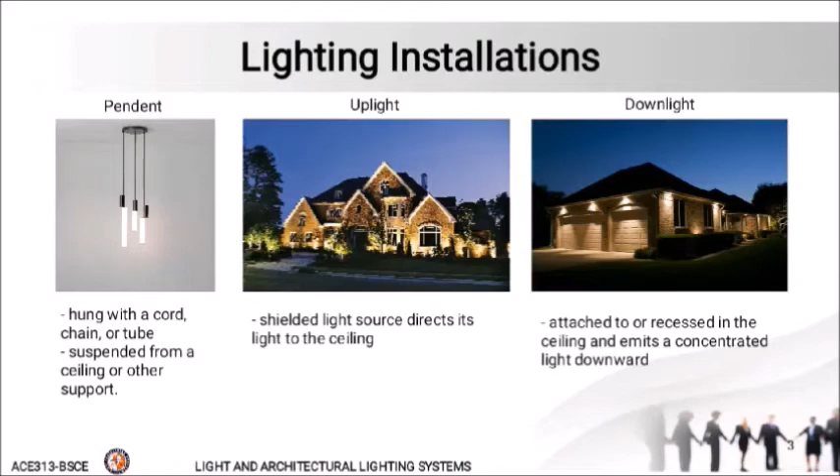Downlight. A downlight is a luminaire that is usually attached to or recessed in the ceiling and emits a concentrated light downward. A high hat. A high hat is a type of downlight that is a recessed canister-shaped luminaire with a shielded lamp that emits light downward. Recessed. Recessed luminaires are mounted above the ceiling or behind a wall or other surface so that any visible projection of light is insignificant.

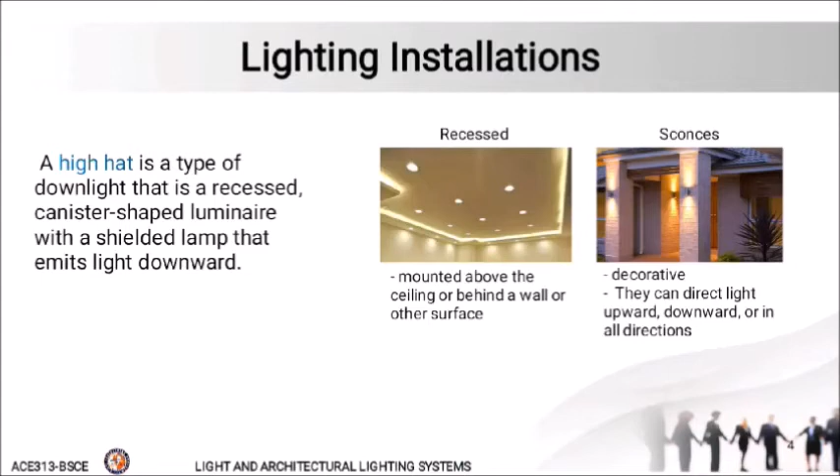Sconces. Sconces are decorative wall-mounted luminaires that provide ambient illumination. They can direct light upward, downward, or in all directions. High bay. High bay luminaires are used in high ceiling areas, 20 feet or 6 meters or higher, that require uniform illumination. High bay fixtures installed in a grid pattern are typically used to provide ambient illumination in warehouses, gymnasiums, and retail superstores. These luminaires are high wattage, with 200 watts or more, so they can deliver light over long distances. The fixture size is fairly large, about 2 feet or 0.6 meters for a typical fixture.

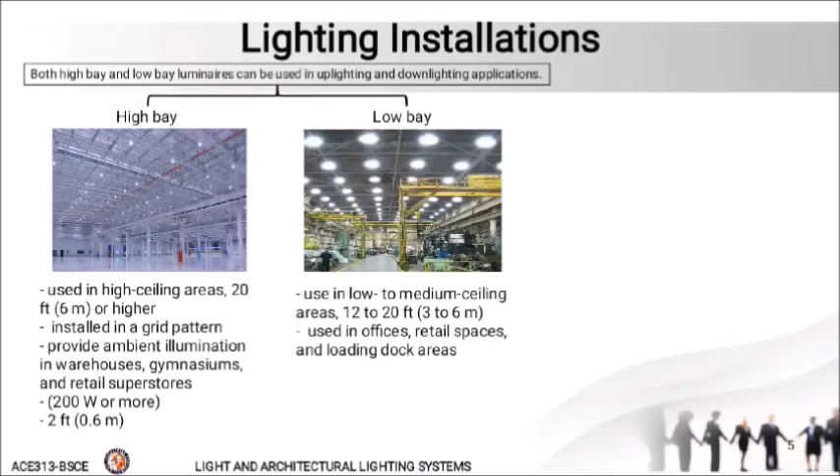Low bay luminaires are more compact. They are designed for use in low to medium ceiling areas, 12 to 20 feet or 3 to 6 meters. They are typically used for general illumination in office, retail spaces, and loading dock areas. Both high bay and low bay luminaires can be used in uplighting and downlighting applications.

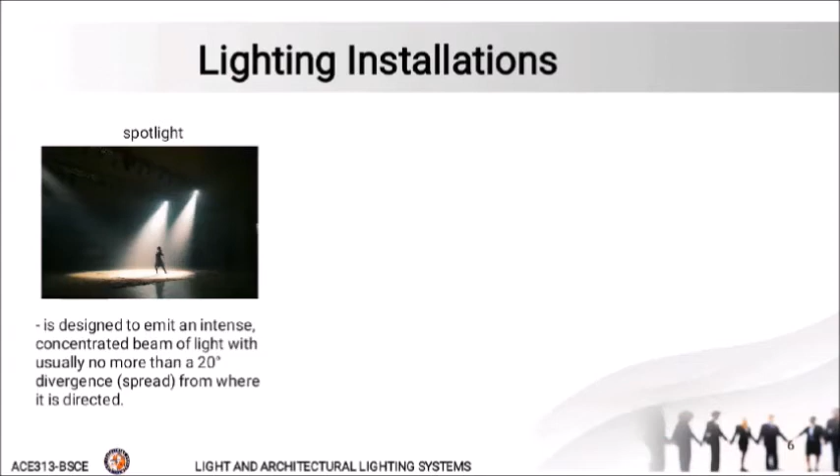Directional lighting is illumination where light received at the work plane or light illuminating an object is incident predominantly from a particular direction. The only light that is important is the light that falls where it is needed. Spot, flood, and track lighting are common types of directional lighting. A spotlight is a luminaire that is designed to emit an intense, concentrated beam of light with usually no more than a 20-degree divergence or spread from where it is directed.

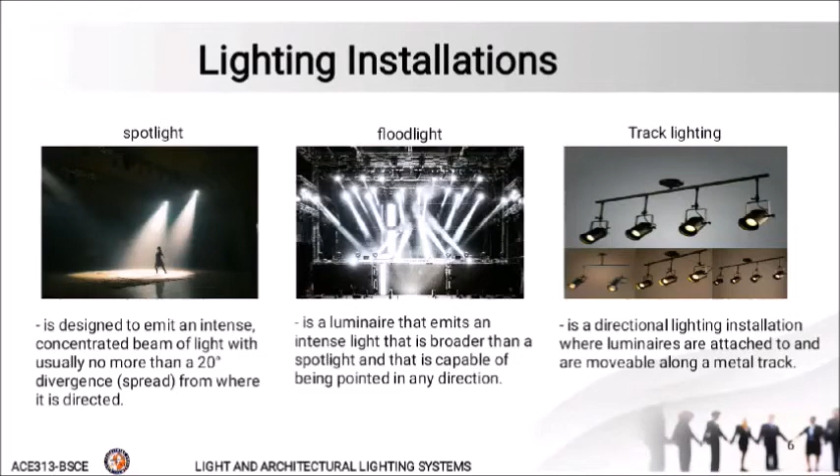A floodlight is a luminaire that emits an intense light that is broader than a spotlight and that is capable of being pointed in any direction. Track lighting is a directional lighting installation where luminaires are attached to and are movable along a metal track. A more subtle method of directional lighting involves the use of one of the many different recessed downlights.

Diffused lighting. Diffuse lighting is a lighting installation in which the light on the plane or on an object is not incident predominantly from a particular direction. Diffuse light is cast and dispersed over a large area. A diffuser is a lighting component, such as a translucent glass refractor, that redirects or scatters the light from a source.

This type of lighting can be produced by a variety of indirect lighting techniques, where much of the light reaches the work plane after it has reflected off another surface, such as a wall or ceiling. Diffuse lighting is frequently used to provide soft background lighting. Cornice, cove, and valance lighting fit in a category of indirect, diffused lighting installation called wall washer.

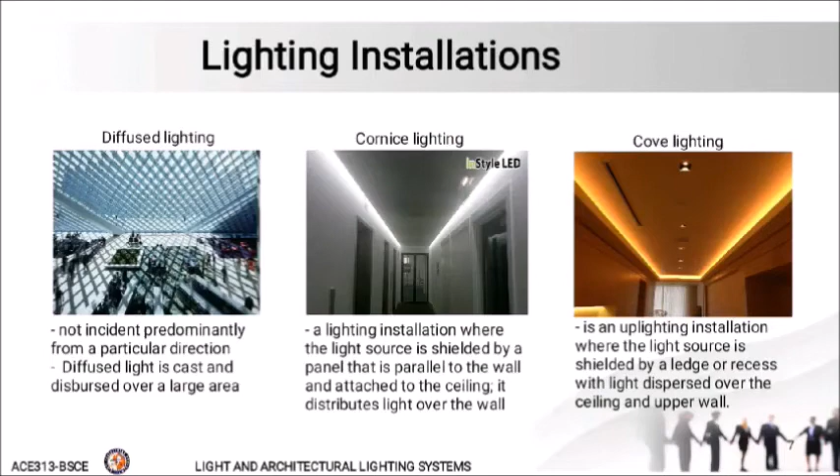Cornice lighting is a lighting installation where the light source is shielded by a panel that is parallel to the wall and attached to the ceiling. It distributes light over the wall. Cove lighting is an uplighting installation where the light source is shielded by a ledge or recess, with light dispersed over the ceiling and upper wall. Valance lighting is a lighting installation where the light source is shielded by a panel that is parallel to the wall at the top of a window.

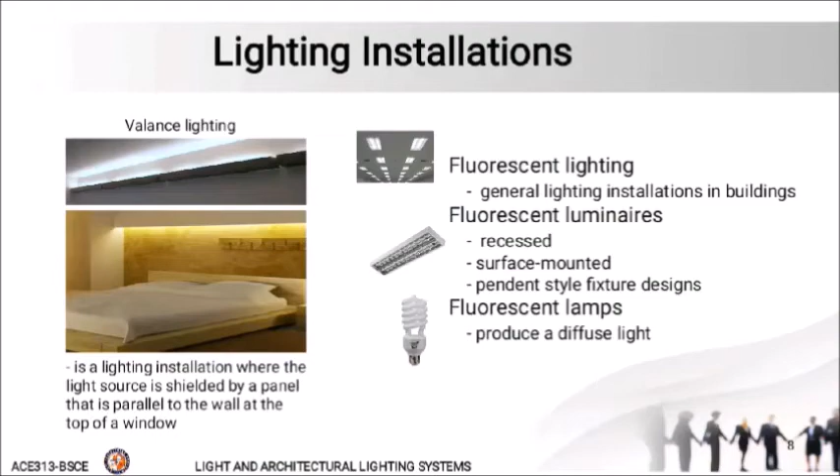Fluorescent lighting is widely used for general lighting installation in buildings. Fluorescent luminaires are available in recessed, surface mounted, or pendent style fixture designs. Unlike the concentrated light emitted by other commercially available light sources, fluorescent lamps produce a diffuse light that is relatively glare-free and visually comfortable.

We also have reflector lamps. Reflector lamps are incandescent, compact fluorescent, or HID lamps with a built-in reflecting surface. Incandescent and HID versions are made from a single piece of blow-molded soft or hard glass. Compact fluorescent versions may be one piece or may be designed so that the inner lamp can be replaced.

An elliptical reflector or ER lamp is an incandescent lamp with an elliptically shaped reflector. This shape produces a focal point directly in front of the lamp that reduces light absorption in some types of luminaires. It is particularly effective at increasing efficiency of baffled downlights.

A parabolic aluminized reflector or PAR lamp, which may use an incandescent filament, a halogen filament tube or HID arc tube, is a precision pressed glass reflector lamp. PAR lamps rely on both the internal reflector and prisms in the lens for the control of the lighting beam.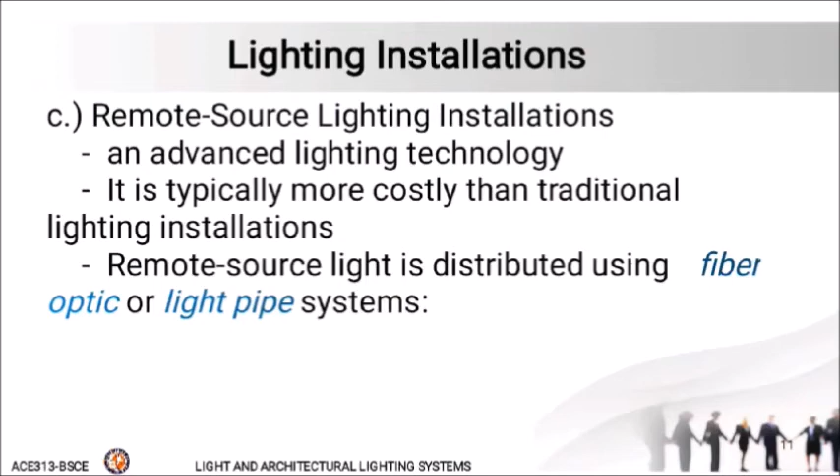Remote source light is distributed using fiber optic or light pipe systems. A fiber optic RSL system consists of a light source, a set of reflectors, filters, and lenses to feed the light to the fiber optic cables, and a fixture to distribute the light at the point of illumination. The number of fixtures that can be fed from the light source depends on the intensity of the light source and the light requirements at the end of the run. For decorative applications where light distribution is not that crucial, several hundred fixtures might be fed from one source.

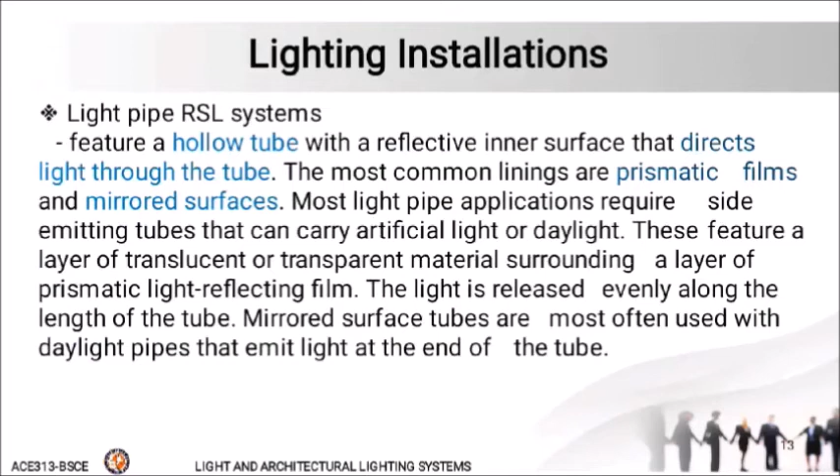Light pipe RSL systems feature a hollow tube with a reflective inner surface that directs light through the tube. The most common linings are prismatic films and mirrored surfaces. Most light pipe applications require side emitting tubes that can carry artificial light or daylight. These feature a layer of translucent or transparent material surrounding a layer of prismatic light reflective film. The light is released evenly along the length of the tube. Mirrored surface tubes are most often used with daylight pipes and emit light at the end of the tube.

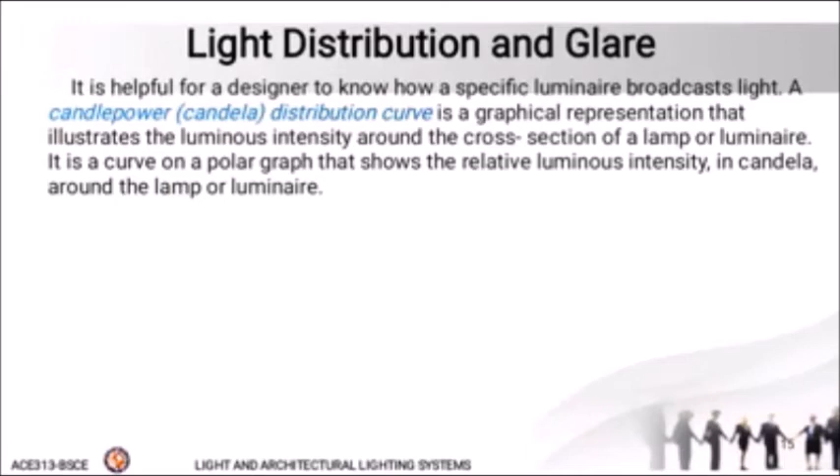A candlepower or candela distribution curve is a graphical representation that illustrates the luminous intensity around the cross-section of a lamp or luminaire. It is a curve on a polar graph that shows the relative luminous intensity in candela around the lamp or luminaire. A candlepower distribution curve can be thought of as a cross-sectional map of intensity or candelas measured at many different angles. It is a two-dimensional representation and therefore shows data for one plane only.

If the distribution of the unit is symmetric, the curve in one plane is sufficient for all calculations. If asymmetric, such as with street lighting and fluorescent units, three or more planes are required. In general, a single vertical plane of photometry describes incandescent and HID reflector units. Fluorescent luminaires require a minimum of one plane along the lamp axis, one across the lamp axis, and one at a 45-degree angle.

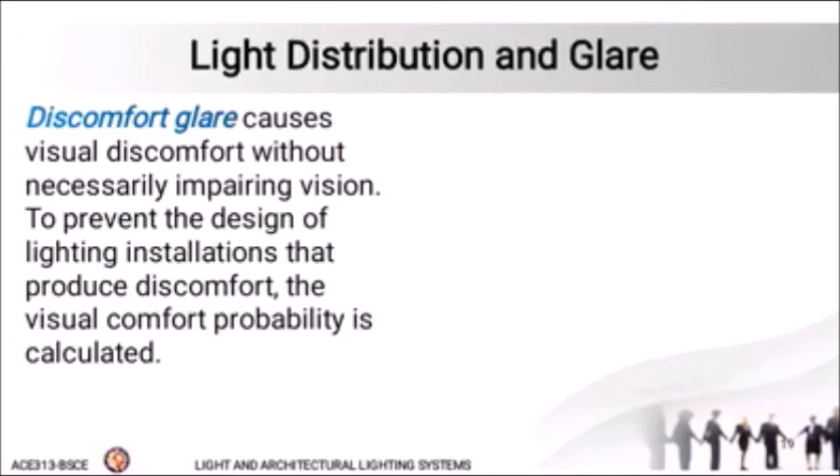Discomfort glare causes visual discomfort without necessarily impairing vision. To prevent the design of lighting installations that produce discomfort, the visual comfort probability is calculated. The visual comfort probability, or VCP, is a rating of a lighting installation expressed as a percentage of individuals who, when viewing from a specific location and in a specified direction, will be expected to find it acceptable in terms of discomfort glare. In most cases, the VCP should exceed 70 percent, that is at least 70% of a statistical group of individuals will rate glare levels acceptable in the space being illuminated.

Disability glare occurs when visibility is impaired from excessive brightness. This type of glare can occur when light scatters in the eye in such a way as to put a veil of luminance across the retina. This type of glare is much like the temporary effect a close-up photographic flash has on the vision of the viewer. It should be avoided at all costs.

Direct glare occurs when excessive light enters the eye directly from a light source. It can occur even if the eye is not looking directly at the source. Problems with direct glare arise from improper placement of the light source, an exposed bright light source, or improperly installed or poorly designed light fixtures. Reflected glare is the result of light entering the eye after reflecting off a glossy surface. This type of glare can occur if the light source is positioned in such a way that its reflected light creates a veil of luminance across the visual task.

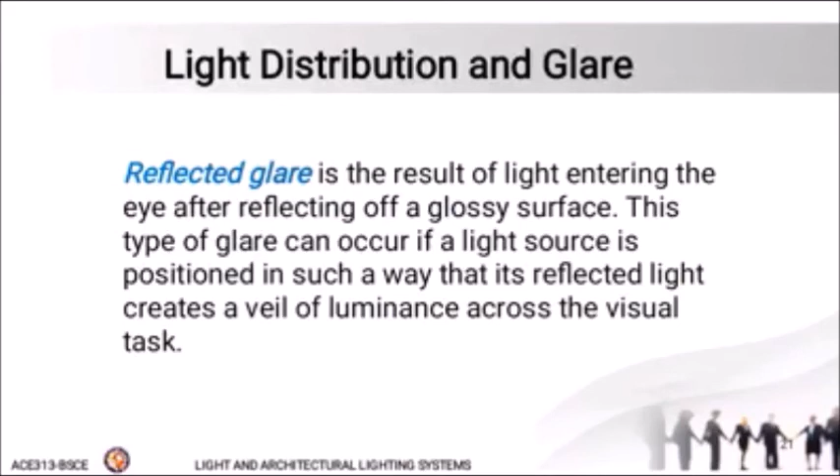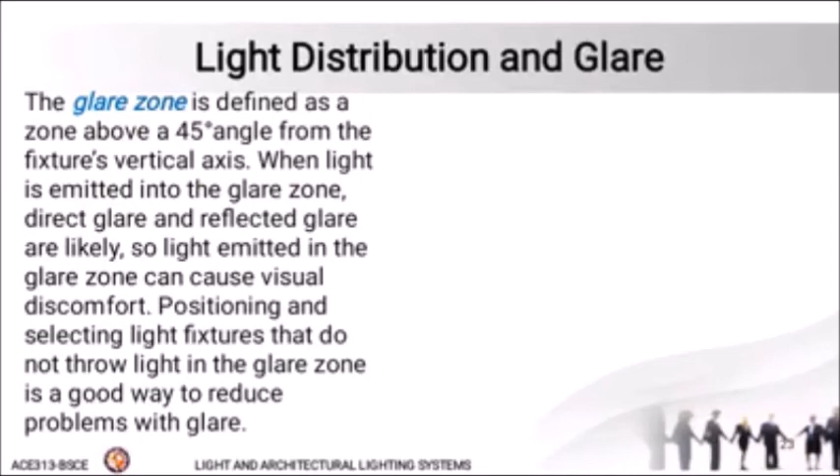Third is glare control. Preventing glare requires special attention to fixture design, selection, and position to prevent light from entering the glare zone. The glare zone is defined as a zone above a 45-degree angle from the fixture's vertical axis. When light is emitted into the glare zone, direct glare and reflected glare are likely; light emitted in the glare zone can cause visual discomfort. Positioning and selecting light fixtures that do not throw light in the glare zone is a good way to reduce problems with glare.

Lenses. Lenses are typically made from clear UV stabilized plastics. Clear lens types include prismatic, batwing, linear batwing, and polarized lenses. White translucent diffusers are much less efficient than clear lenses, and they result in relatively low visual comfort probability. Louvers. Louvers are slats in light fixtures that create openings for emitting light. Louvers provide superior glare control and high visual comfort compared with lens diffuser systems. The most common application of louvers is to eliminate fixture glare reflected on computer screens.

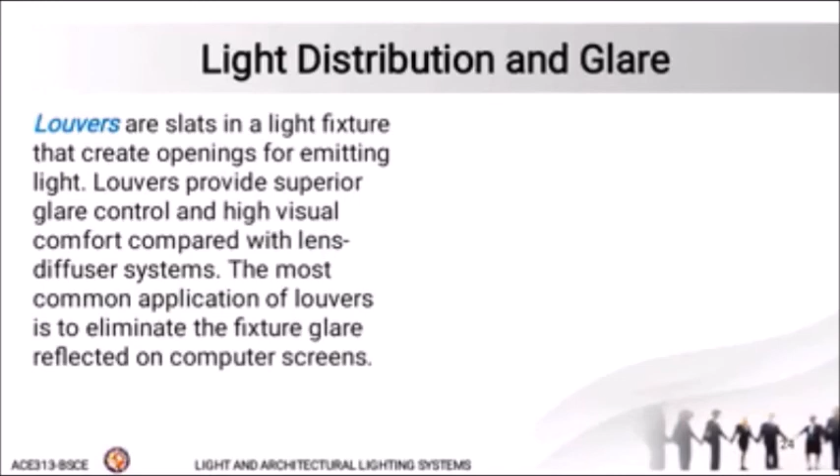Let's proceed to the last topic, which is illuminance and luminance. As described previously, illuminance is the amount of light incident on or striking a surface. Luminance is the amount of light leaving an object, thus relating to how bright an object appears to the human eye. Although an object may be illuminated, the eye cannot see it without visible light leaving or reflecting off the object in the direction of the viewer. The luminance of the surface is equal to the reflected illuminance.

What is luminance? Luminance is the luminous intensity of a surface in a given direction per unit of projected area of the surface. Luminance can be expressed in two ways, in candelas per unit area or in lumens per unit area.

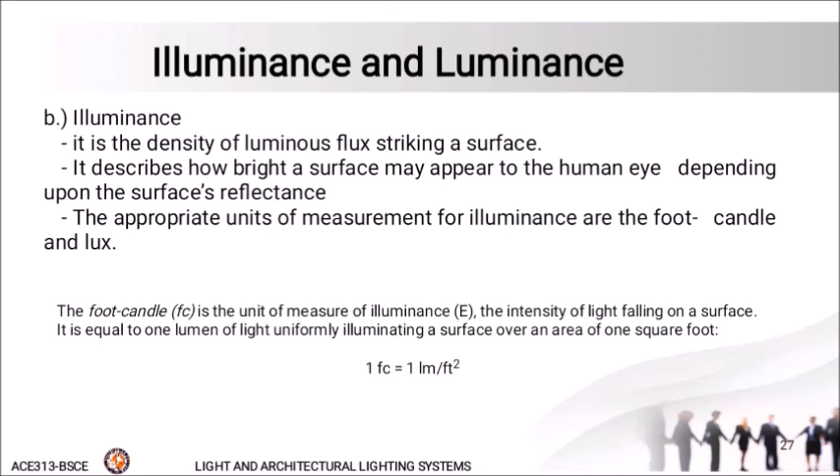The foot candle, or FC, is the unit of measure of illuminance E, the intensity of light falling on the surface. It is equal to 1 lumen of light uniformly illuminating a surface over the area of 1 square foot. 1 foot candle is equivalent to 1 lumen per foot squared.

The foot candle, the oldest physical unit still in common use, was originally defined as the illuminance striking a surface held 1 foot away from a burning beeswax candle. Foot candles incident on a surface are related to the lumens striking the surface and the area of the surface A in foot squared.

The SI metric unit for illuminance is the lux, which is 1 lumen of light uniformly illuminating a 1 square meter surface, lumen per meter squared. Lux incident on a surface are related to the lumens striking the surface and the area of the surface in meter squared.

1 foot candle is roughly equal to 10 lux. Foot candle or FC is equivalent to 10.764 lux, while lux is equivalent to 0.0929 foot candle. Typical values of illuminance for selected conditions are provided in Table 20.16. By comparison, natural sunlight illuminates a surface 100,000 times more than light cast by a full moon on a clear night.

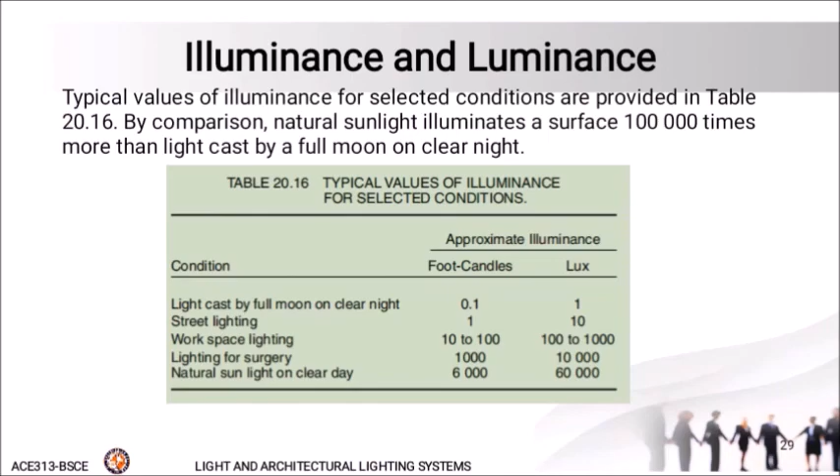Illuminance at a specific location in a room or space can be measured with a portable handheld photometer that is commonly called a light meter. The IESNA prescribes exact methods of determining illuminance in its lighting handbook.

Light meter readings at a specific location are generally performed by holding and placing the meter in a horizontal position on a desk or tabletop in the location where the task will be performed. In special instances, such as warehouse shelving and library book stacks, the meter is held vertically. Care must be exercised to ensure the shadows from the meter user do not improperly influence results.

Average illuminance in a space can be determined by dividing the room into a grid pattern that does not correspond with the spacing of the light fixtures and averaging the readings. Because of site conditions and manufacturing tolerances, average measured values may vary by 20% or more from calculated design values.

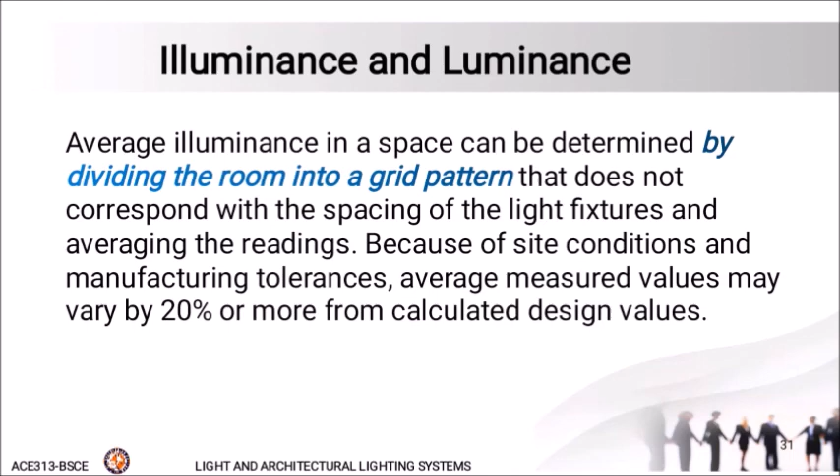Recommended illuminance. Historically, the chief goal of architectural lighting was to introduce as much light as possible to a building interior. That is, more light was good. The result was large lighting installations that consumed a lot of energy. The illuminance categories are ranked in alphabetical order from A through I by type of activity and seeing difficulty as outlined in the following.

Categories A through C have ranges of illuminance from 2, 3, 5 to 10, 15, 20 foot candle, or 20, 30, 50 to 100, 150, and 200 lux. They are for ambient lighting in public and working spaces, including corridors, lobbies, stairs, and conversation areas. Examples are restaurant and exhibition areas.

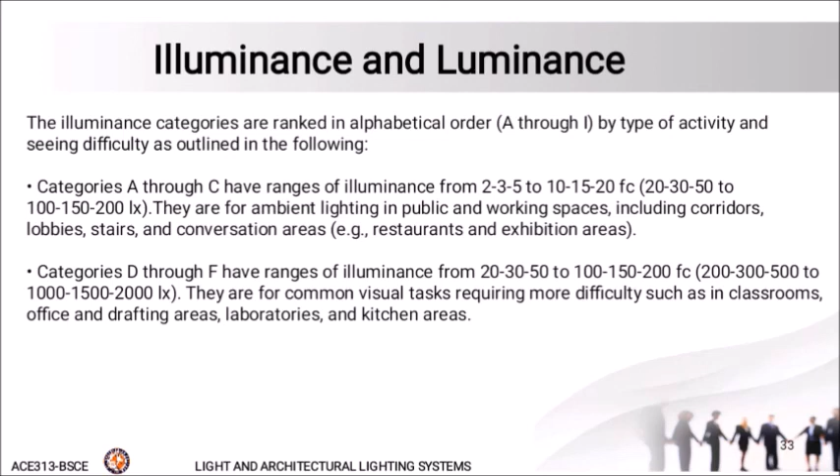Categories D through F have ranges of illuminance from 20, 30, 50 to 100, 150, 200 foot candle, or 200, 300, 500 to 1000, 1500, 2000 lux. They are for common visual tasks requiring more difficulty such as in classroom, office, and drafting areas, laboratories, and kitchen areas.

Categories G through I have ranges of illuminance from 200, 300, 500 to 1000, 1,500, 2,000 foot candle, or 2,000, 3,000, 5,000 to 10,000, 15,000, 20,000 lux. They are for prolonged, visually demanding tasks involving sewing, precision machining, and surgery.

Recommendations for levels of lighting in various spaces are provided in Table 20.17. In general, recommended lighting levels increase as the size and contrast of the visual task decrease. Thus, the recommended lighting level will be near the lower level of the range when the size and/or contrast of the visual task is large, and will be near the upper level of the range when the size and/or contrast of the visual task is small. Governmental entities may specify levels of illumination.